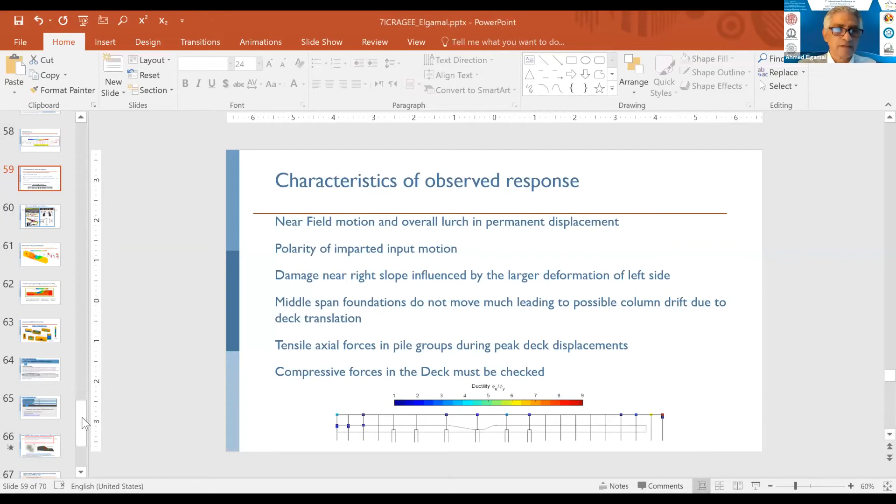It's a great honor to join you and have this opportunity to present my lecture. So let me please share my screen. Yes, sorry for interrupting, Dr. Ahmed. You have 40 minutes. Kindly let us see that you will complete your lecture, so that we'll have some time for interactions, please. Absolutely. Thank you. Thanks. Okay. Thank you, Laura. I think you can see my screen now. Yeah, it's good. Yes, very good. Yes. Thank you.

So I would like to focus today on computational simulation of nonlinear soil structure interaction with some applications, including applications for bridge systems and liquefaction. It's been a long journey trying to develop better tools for analysis of soil structure interaction, and it's still a continuing journey. Where I will leave off, others will continue. So some progress has been made, and I hope to share with you some insights and highlights of the work that has been done over the years.

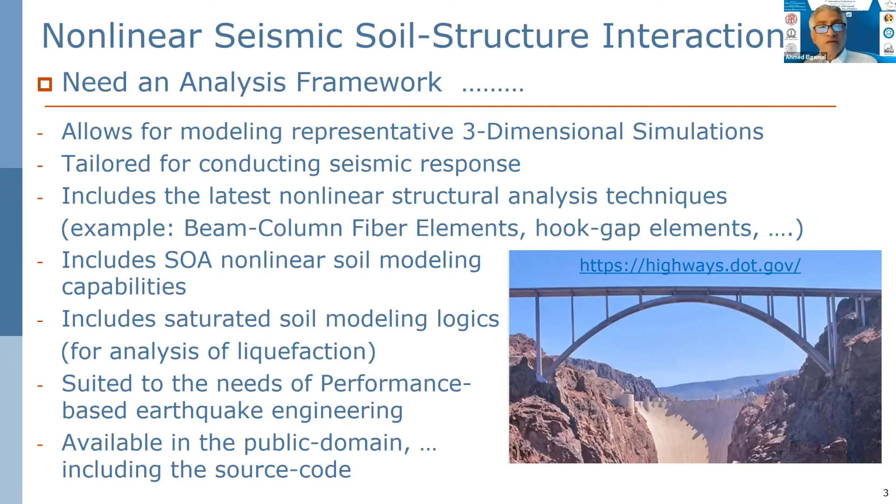Again, to get these tools to be more representative, much effort has always gone into calibration.

This is an illustration of our participation in Project LEAP for numerical simulation of centrifuge experiments conducted under this project under the leadership of Professors Kutter, Manzari, Zeghal, Ueda, and others.

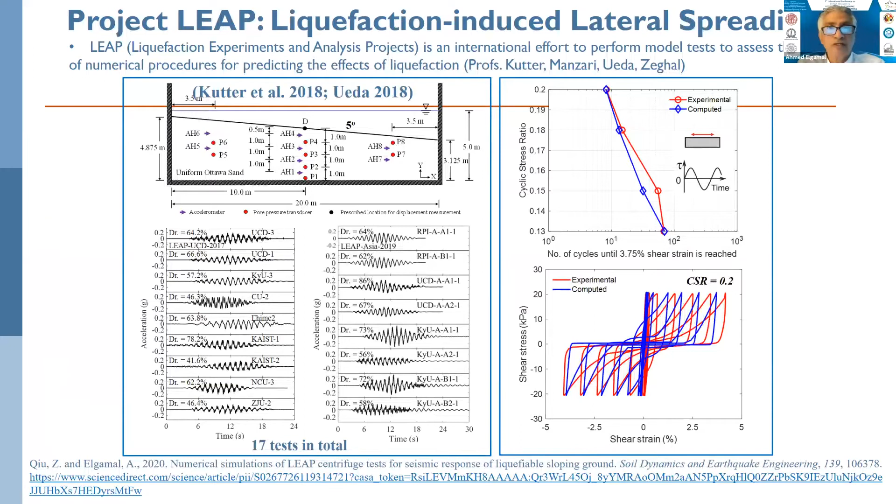Even with results available from centrifuge experiments and one-dimensional downhole array recorded motions from actual earthquakes, there is still room for more realistic outcomes from numerical tools when applied to three-dimensional simulation, particularly as it relates to soil structure interaction, which places additional demands on the level of strains near the structure as it pushes and pulls on the soil, as I'll try to show now.

I will present some of our work on three-dimensional soil structure interaction, looking first at situations where shear strains are relatively small, where equivalent linear analysis might yield reasonable outcomes. Then we'll look at large strains with elastoplastic analysis, and then scenarios with much larger strains, on the order of 10%, associated with liquefaction.

And then some strains, again as a consequence of liquefaction, in the vicinity of a foundation where the soil flows around it with strains much larger than 10%, trying to show this in the context of three-dimensional numerical simulations.

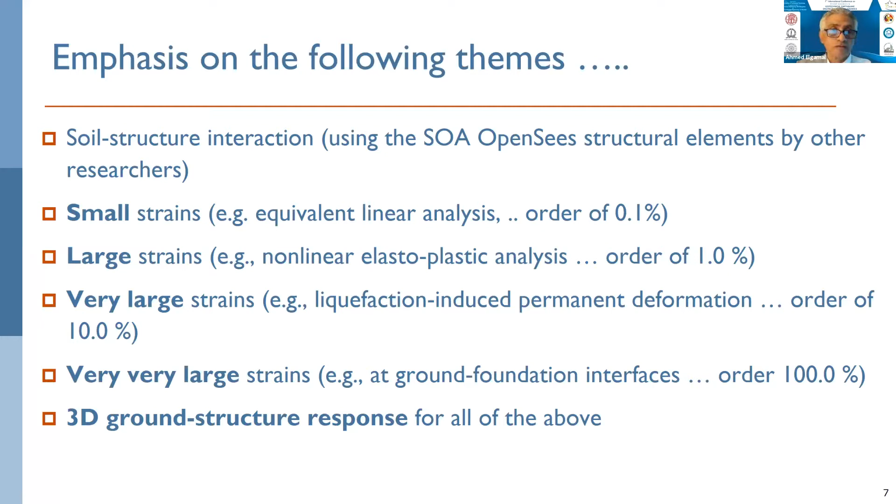We'll look at the response of an embedded structure and take the opportunity to look at site response away from the structure. Then we'll look at large pile groups, a wharf on piles, and three-dimensional bridge systems, including liquefaction.

Let's start with site response and embedded structures, as in situations such as nuclear power plant containment structures. In this study, the soil mesh is very large compared with the size of the structure, which is substantial in its own right.

Because of symmetry, it's a three-dimensional mesh, with shaking taking place in the lateral direction, shown here as a half mesh. With the input motion imparted at the base of the ground, we studied the outcomes when this motion is scaled by 1, doubled, tripled, and quadrupled in amplitude, comparing the response of fully nonlinear and equivalent linear analysis under these four levels of seismic excitation.

We also included a no-tension condition between the structure and the soil, a more realistic way to model the interaction, and had a transmitting boundary at the base. We used a pressure-dependent soil model for our nonlinear analysis.

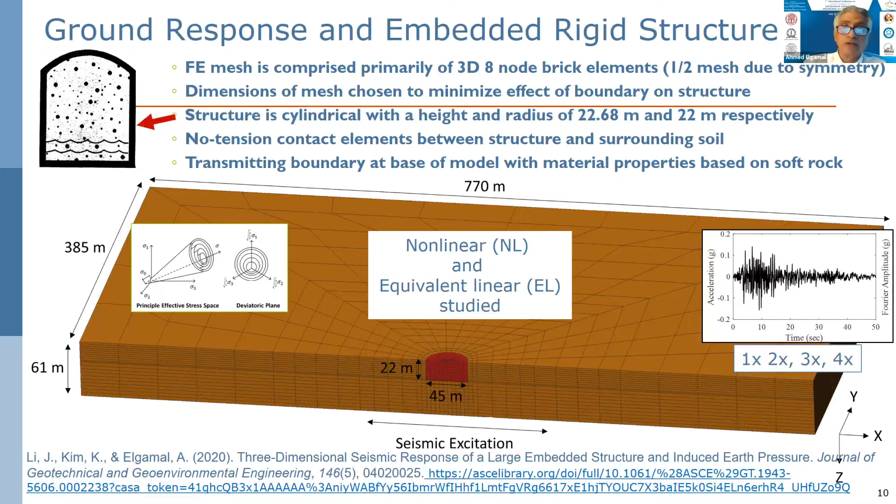As you know, in the equivalent linear analysis, the work is done by a secant modulus and equivalent damping at a particular shear strain level. And you see here that the reduction in modulus with strain amplitude is quite substantial. For example, here we go down approximately to 20% of initial shear modulus at a strain of 0.3%.

So if we look at the free field ground response in the beginning, we're showing here the shaking as it was, and then the shaking when it was scaled to 4 times its amplitude, so that's much higher shaking. We see at ground surface that at low levels of shaking, as you might expect, the nonlinear model and the equivalent linear yield very reasonable results and very close.

The response at ground surface is significantly larger than the response at the level of the base of the structure at 23 meters depth, if you compare this 6 and this 4.

And when you go to the 4 times the level of shaking, you see, of course, that because of nonlinear effects, this resonance peak is much muted and it is spread over the frequency range compared with the low level of shaking. And both the equivalent linear and nonlinear to some degree reproduce this.

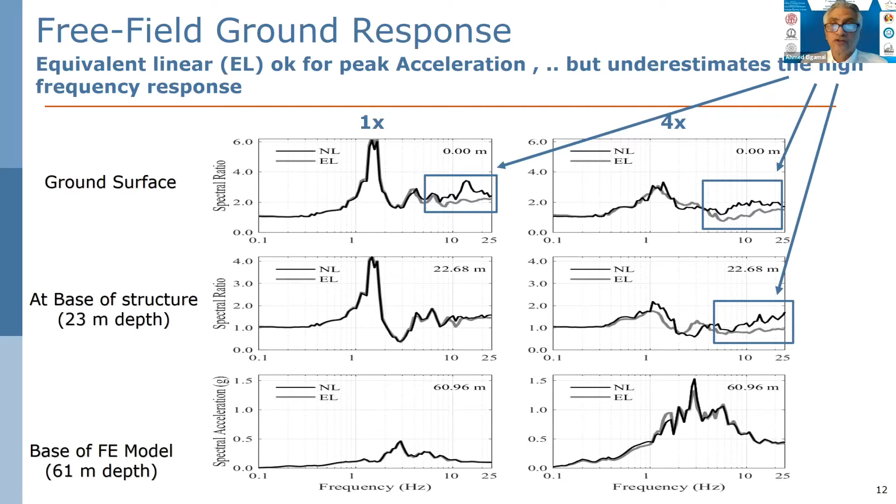Okay, so we go now to the response of the structure itself. Since the structure is at 23 meters below ground at its base, and the structure is fairly rigid, the first thing we see when we compare its response to the free field is that at the ground surface, the structural response is much less.

Also, the high frequency response, which is a consequence to some degree of site amplification in the upper several meters of the ground, is much reduced. And in general, the response of the structure is very similar to its response at its base at 23 meters depth, which is, of course, something that helps the structure a lot in having lower amplitudes of shaking and response.

So the deeper the embedment of the structure is, the less levels of shaking that will be observed compared to the nearby free field, which is good news.

Again, this is shown at 1 times the shaking and 4 times the shaking, the same thing where you see the free field is always much higher than the response of the structure, which is similar to its response at its embedded depth.

So when we found that the response of the structure is much less this way compared with ground surface response, and the high frequency response is much less as well,

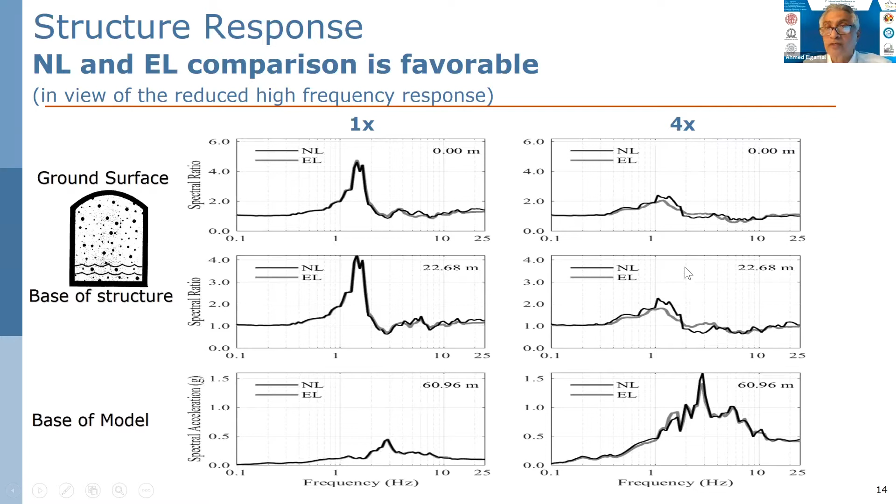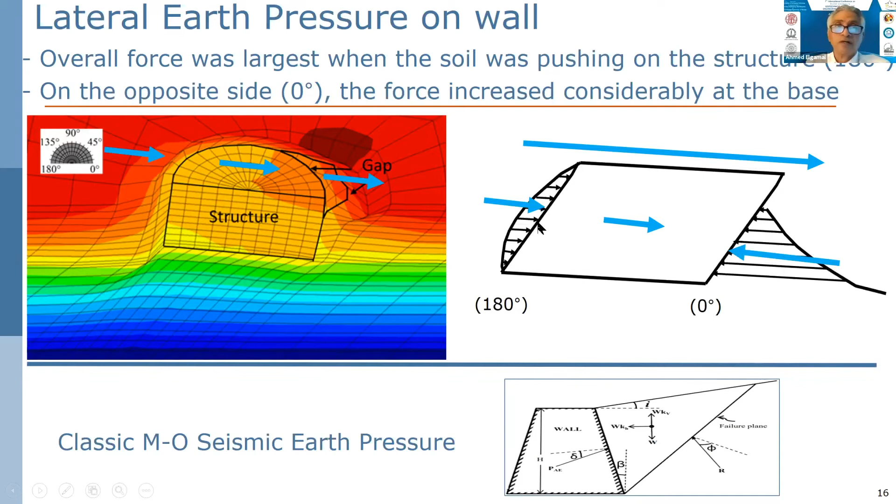So in summary, for the ground response, the site response at these relatively low levels of strain, equivalent linear analyses are reasonable, but underestimate high frequency response. For the structure itself, the high frequency response is much reduced. The acceleration at the top is very similar to the acceleration at the base, which is quite lower than the free field acceleration. The equivalent linear acceleration response compared well with the nonlinear counterpart all around, giving a reasonable result.

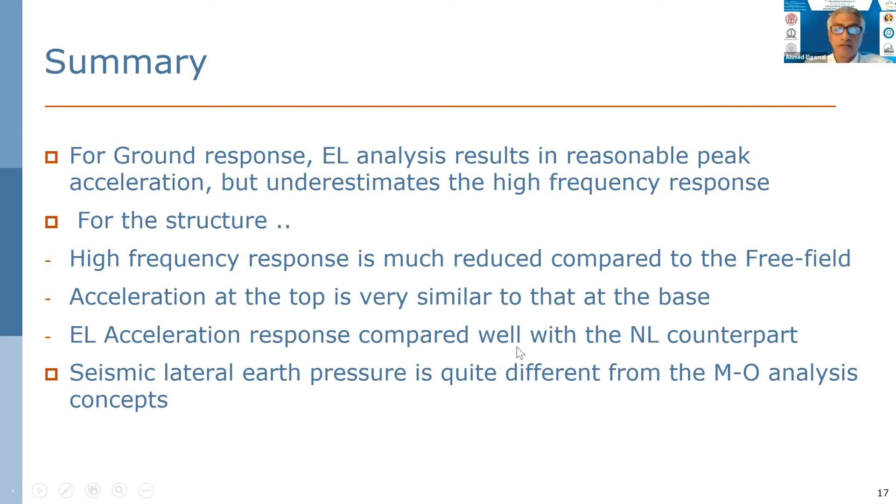And seismic lateral earth pressure is quite different from the Mononobe-Okabe analysis.

Now, moving on to large pile groups. There was an opportunity to look at the behavior of a pile group in a bridge where navigation is allowed in the center of the channel, for this Dumbarton Bridge scenario, for example. To allow for this navigation near the center of the channel, the bridge is very high.

As you see here, when we look at the bridge along its side view, in the center, these piers have a deck that is 27 meters above water level. Then there is the pile cap, and 14 meters into the water is where the mud line is. The piles are embedded 16 meters into the ground. So between the deck and the mud line, we have about 40 meters of elevation.

So when shaking comes laterally, in addition to the shear force experienced by the pile group, a huge moment will also be acting because of this very large moment arm, and the pile group will be subjected to a very large moment and at the same time a very large shear force. Whereas we tend to study pile groups under lateral load for seismic analysis, as I will try to show in this case, axial loads coming from that moment are much more important potentially, and might actually be the main cause for trouble compared with the shear force alone.

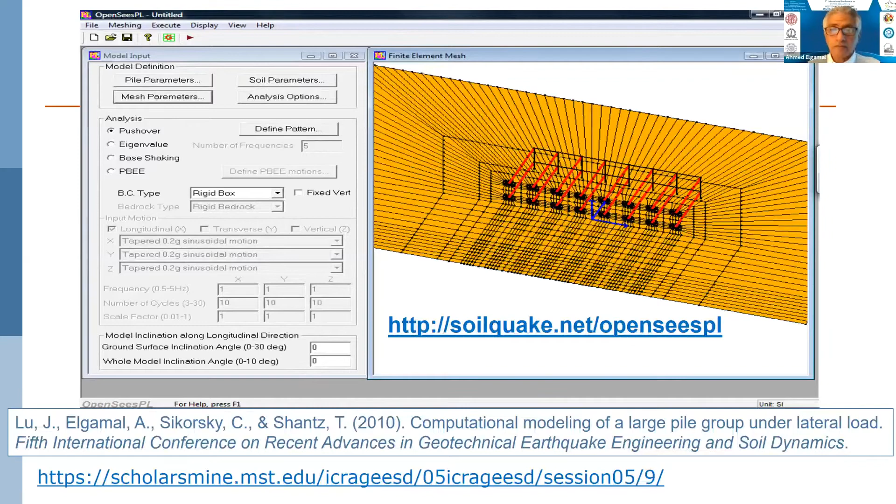So we use this platform, OpenSees PL, which is capable of producing finite element meshes in a user interface to look at pile groups that way. With a pressure independent soil, elastoplastic soil model, we looked at the bridge's own weight effects and the effects under lateral pushover analysis, equivalent to as high as the weight of the deck in the horizontal direction, as if there is a pulse of 1G applied to the bridge. You can see that the response of the pile group is highly nonlinear compared with its initial response because of the behavior of the piles, but also the nonlinear soil in this simulation.

Moments on the piles in this case were, of course, as you might know, corner piles ended up shouldering much more load than inner piles. This is again a half mesh, so these are the inner piles, these are the outer piles, and this is the corner pile. As the level of load increases, you see that the peak moment location is going downwards into the ground because of yield of the soil gradually from the high displacements of the pile from the mud line further down.

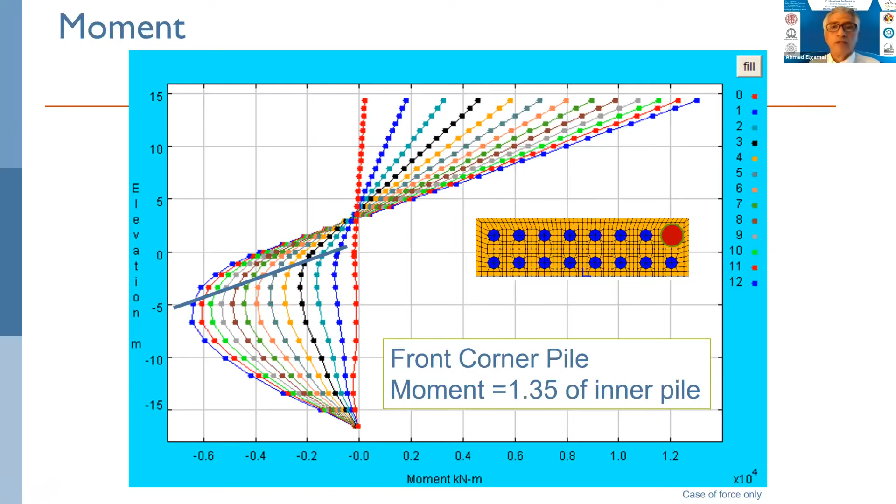Now looking at axial forces, just under the own weight, static own weight of the bridge, you see again that the corner piles carry much more of the axial load than the inner piles, and the edge piles also carry higher load than the inner piles. This is documented in the literature as an important mechanism, because of the availability of more outer soil here to resist load compared with the soil that is shared here by many piles and experiences load from many piles at the same time. Consequently these inner piles end up being in a flexible part of the soil and carry much less load compared with these outer piles and the corner pile in particular.

Now if we look at the situation where the pushover just included the horizontal force first, instead of the force and moment together, we see that the loads on the piles increase in the front here where there is compression, increase a lot more, and also turn from being compressive to tensile because of that very large moment, being 3.4 times, for example, the axial load under static load, as a normalizing quantity for a single pile scenario. So 3 times the load in tension as compared with 1 time the load in compression under just the own weight of the bridge.

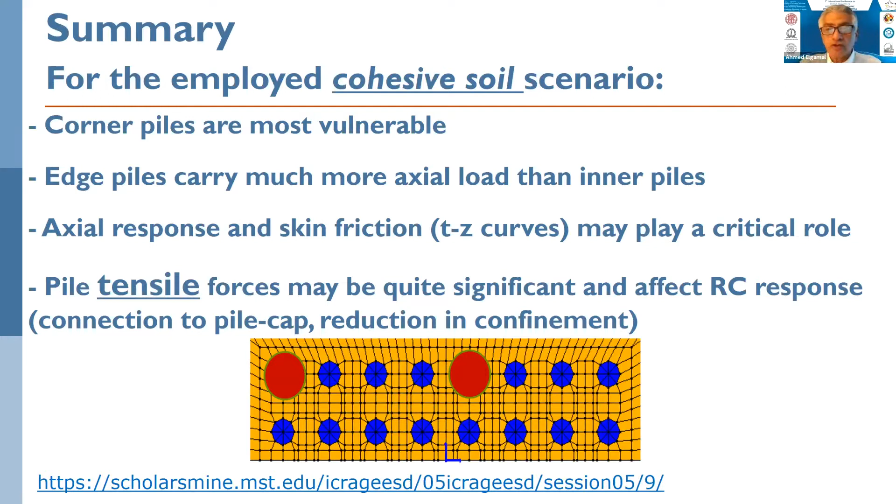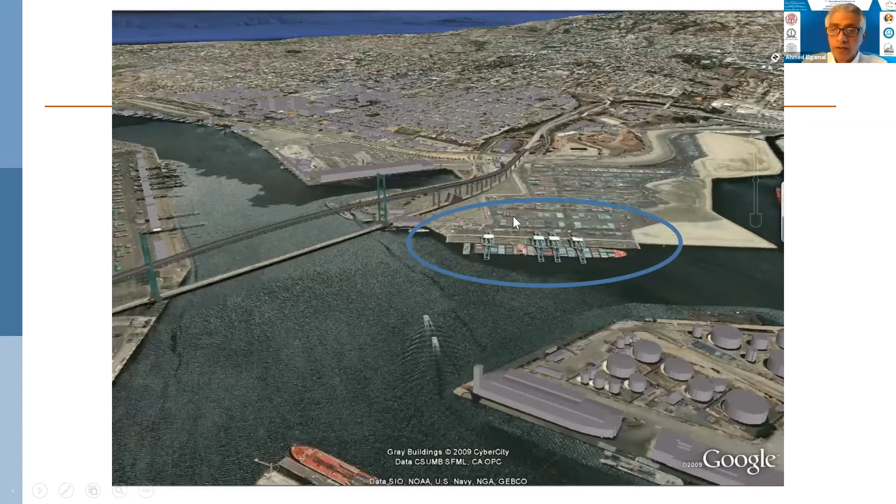Okay, if we look at a scenario of wharfs on piles - these types of structures are the prevalent type of wharf foundation in the United States. This is a picture from the Port of Los Angeles. The ship is here, the container ship is here, and the wharf is here. This is a close-up of the wharf, and here is the container ship. This wharf is supported on many, many piles, as you see here.

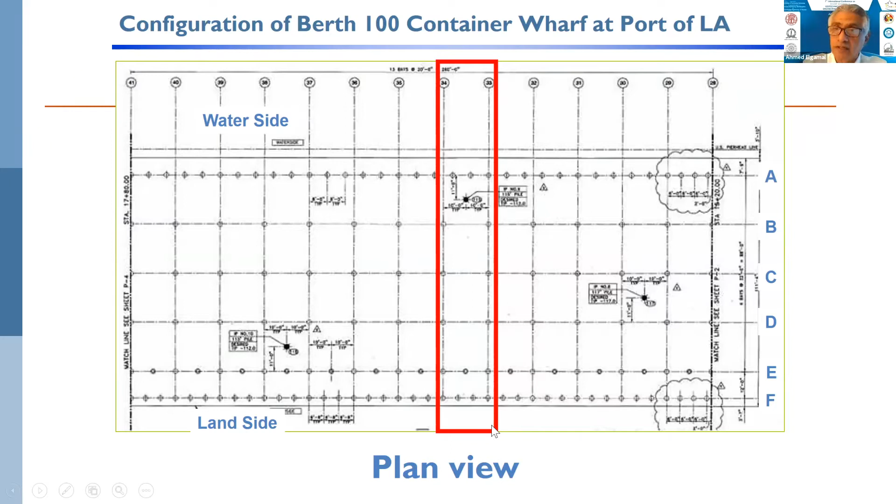So when we looked at the plan view of this wharf, we saw that the pattern of the piles keeps on repeating itself from one end of the wharf to the other. And so that allows us to take a three-dimensional slice and study it as a representative of the response of the entire wharf from beginning to end, a symmetry slice if you will, but it's a three-dimensional slice. So this is here the three-dimensional slice.

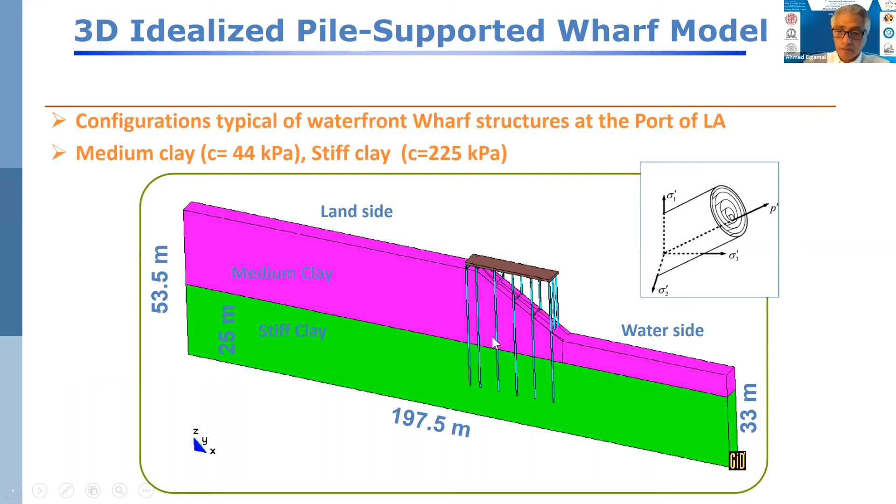Again, doing seismic excitation by shaking at the base, by including one-dimensional shear beam columns that capture boundary conditions on the right and on the left, which is essentially free field response on the land side, free field response on the water side.

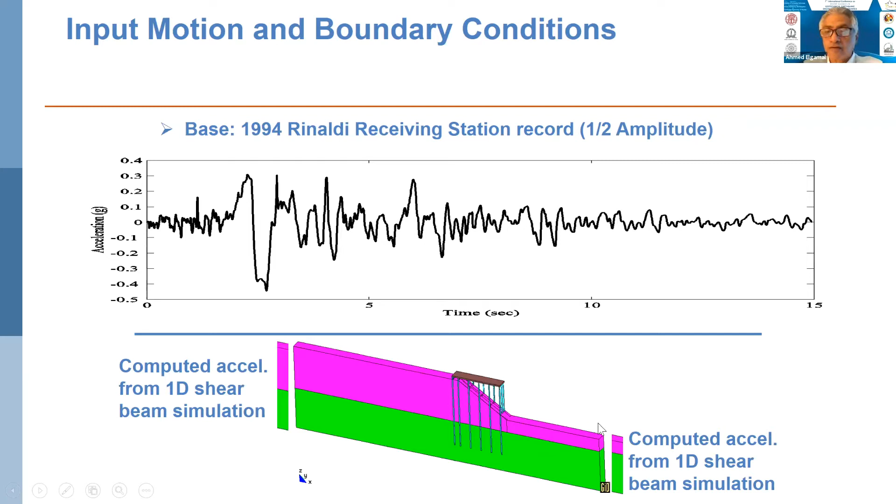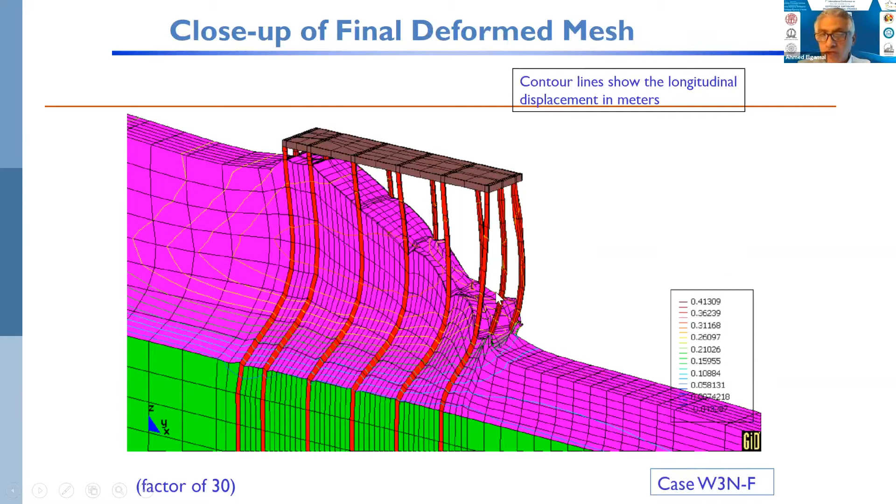The piles change the configuration of the deformation of the slope, and this displacement pattern is very different from the pattern if the piles were not present. So here is the deformed configuration after shaking. And it's obvious that all piles, actually, the piles that have a very large free length, and the ones that have a very small free length, all deform in a similar way because they're all deforming according to the deformation of the slope. And in a sense, it's all an integrated deformation. There is no additional deformation in the front, for example, compared to the back.

So in general, to a great extent, the front piles and the back piles undergo very similar displacements and relatively similar moments, which was something some people disputed, proposing that the front piles, because of their free length, are more flexible and suffer less than the back pile that doesn't have as much free length.

As importantly, since all these piles are connected to a very rigid deck at the top, because of the deformation of the slope downwards on the land side and upwards on the water side, all kinds of tensile forces evolve in the piles since they're all connected at the top. So you get compression, you get additional tension, and depending on the part of the pile in the softer soil versus the stiffer soil, you get all these kinds of changes.

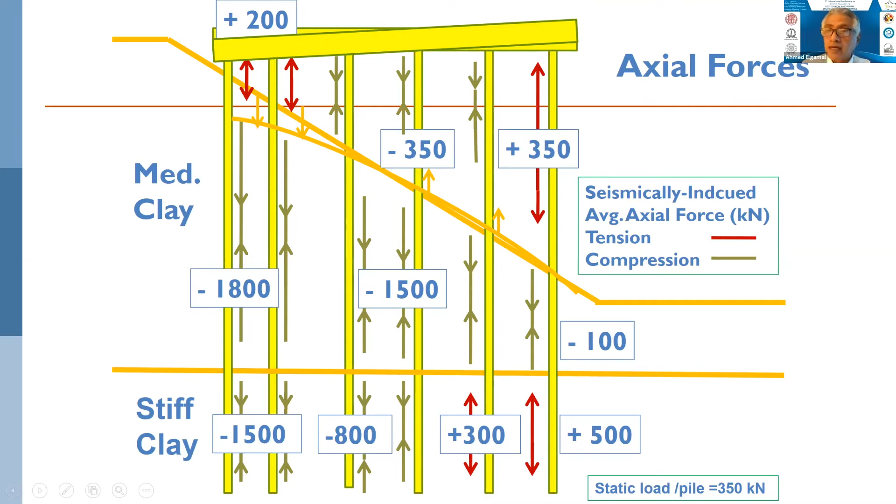It's likely that tensile forces might play a very significant role in the integrity of the wharf-on-pile scenario, compared with just the attention everyone pays to lateral deformation and the additional moments imposed on the pile. So what this slide is attempting to say is that in addition to bending, axial loads are quite important and require further attention.

Okay, so going quickly to bridge ground systems.

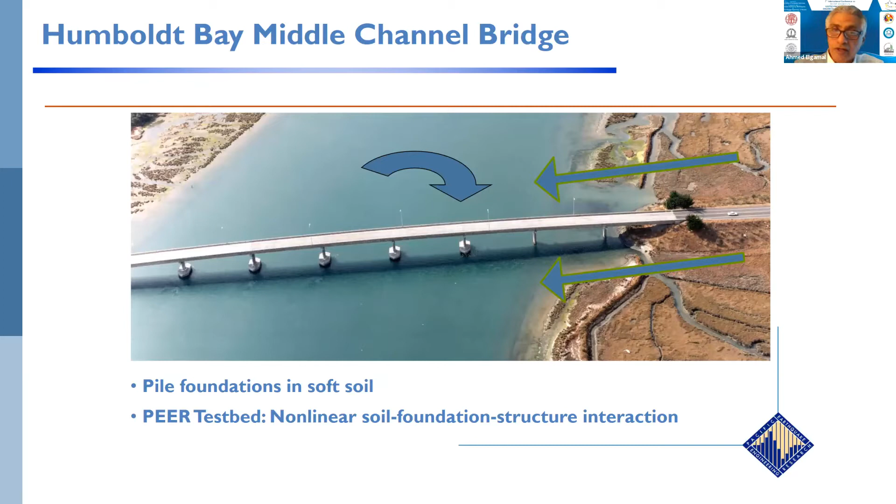Three-dimensional simulation for bridges is actually something that leads to much more realistic outcomes. This was an effort done early on, several years ago, and the idea was to try to capture some of the things that idealizations in 2D are not able to capture. For example, the 3D pile foundation configuration, the 3D ground response, and the 3D characteristics of the response of the deck and abutments can only be captured if the simulation is done in three dimensions.

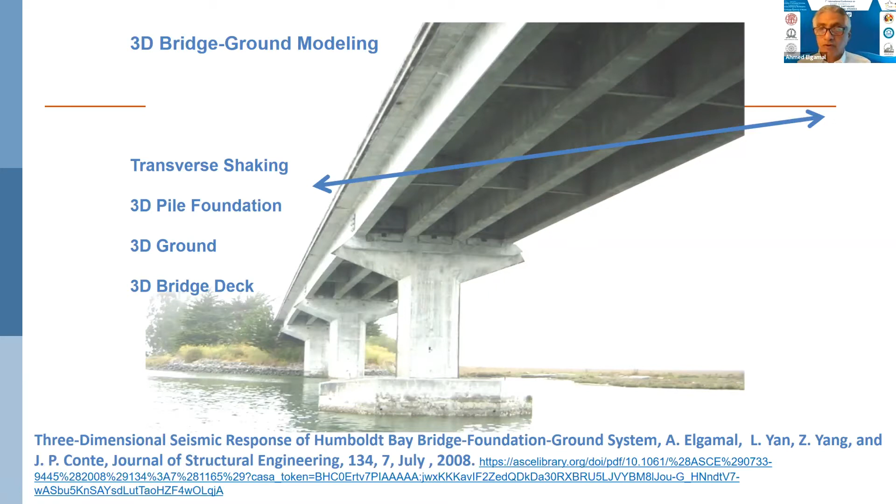OpenSees allows for, as I mentioned earlier, integration of state-of-the-art fiber element beam column elements to represent the nonlinear response of the bridge structural elements. So along with the nonlinear soil response, the bridge is also modeled using the latest tools available for nonlinear response of reinforced concrete, tools that are still available in OpenSees by Professor Fillippou of UC Berkeley.

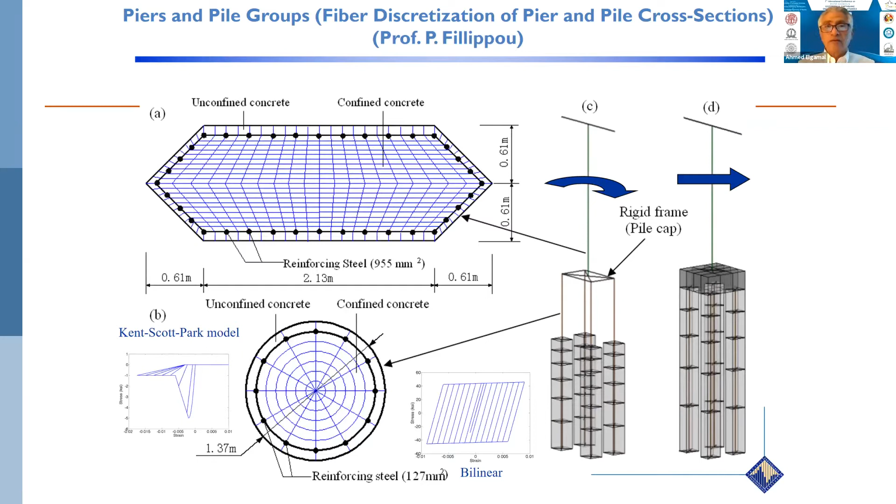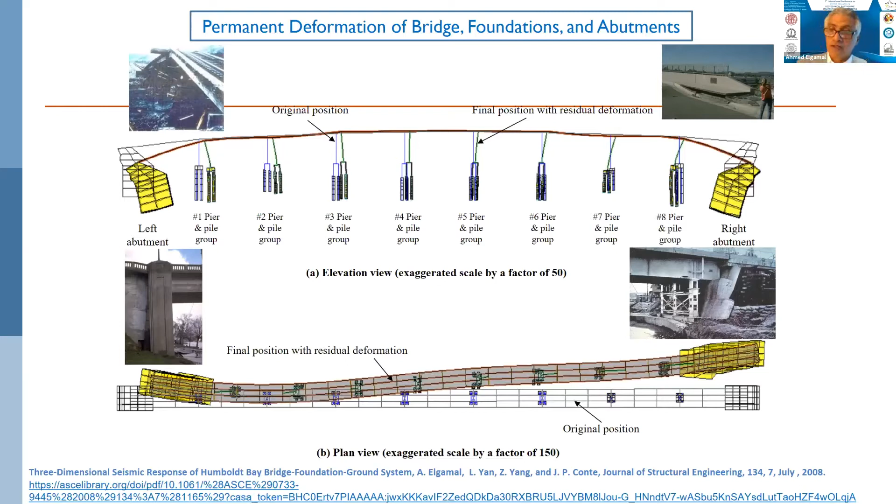Okay, moving on to looking at bridges under liquefaction. We have been looking at a few actual bridge scenarios from California, where the bridge has different structural configurations at different sections of it, and different cross sections of the support, such as the shear wall, the columns, or the piles.

The soil is also not uniform along the longitudinal direction of the bridge. Different soils, according to the borings, are idealized here in terms of 3 different configurations: on the left, in the center, and on the right of the bridge.

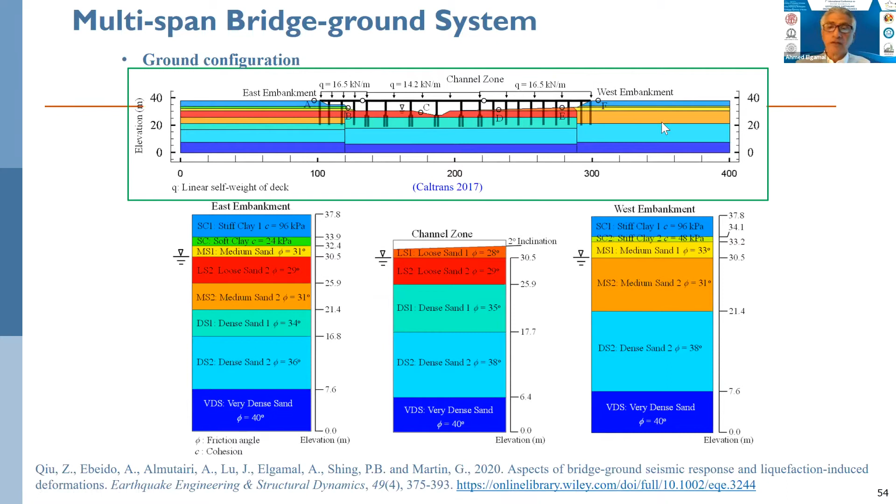Everything for the bridge is modeled with fiber elements. Similar to what we did for the wharf, we attempted to take a slice in the bridge in its longitudinal direction. This slice is not as representative because the bridge is not as wide in the transverse direction as the wharf, but it still allowed us to observe some mechanisms of the response that are quite significant.

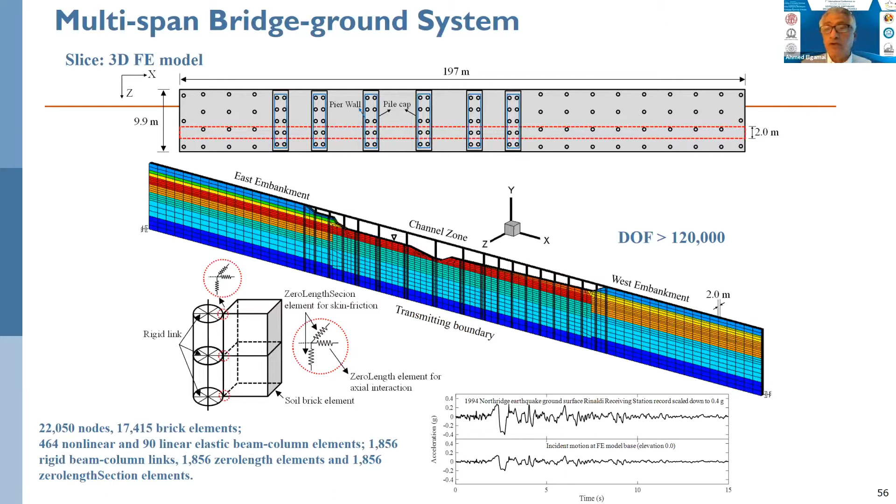In this case, we did shaking using Rinaldi motions from the Northridge earthquake. The important thing about it is that it's a near field motion with a preferred pulse in one direction. This has a consequence on the response of the bridge, in that in addition to the ground deformation near the slopes and abutments, with soil flowing toward the center of the channel on both sides, the entire ground ends up with a permanent deformation in a preferred direction because of this near field pulse.

If you reverse the input direction of the motion, what is positive in acceleration becomes negative, and what is negative becomes positive, and this permanent deformation will revert to the other direction. So what is really happening here is a consequence of this overall lurch because of the near field pulse, plus the slope deformations on both sides, added together to produce the outcome.

Because of this permanent lurch, the deck moves forward permanently on both sides, and along with this forward motion, the slope is also pushing on the deck this way. So we end up with the soil on the right side pushing to the left.

Because of the forces coming from the deformation on the left side and the lurch, the deck moves to the right. So we end up with trouble here, not only coming from the slope deformation, but also from the deck moving in the opposite direction, causing forward motion at the top, backward motion below, and additional trouble to the piles. These piles are affected by what is happening on the other side, not only by the local slope, which emphasizes the need to look at response in three dimensions.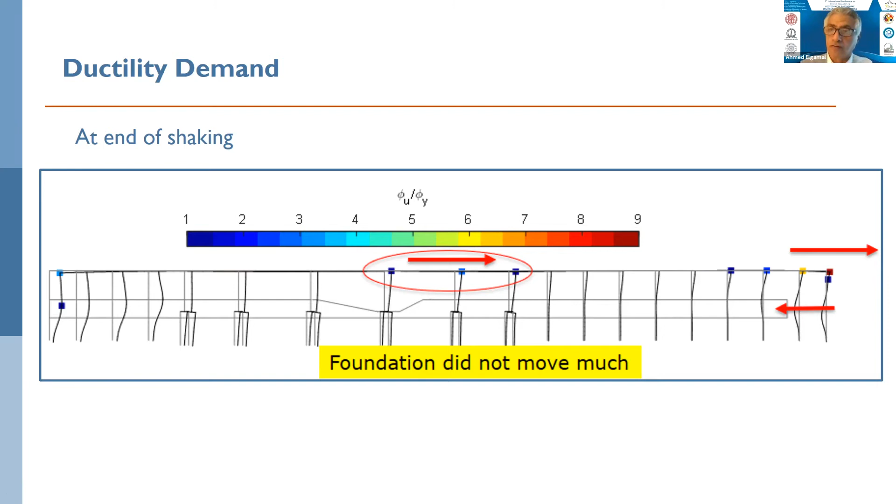In the center of the channel, the foundation doesn't move much, but the deck moves permanently, which can result in unseating and large moments on the middle section piles. This is something not captured at all when people study the left side on its own, or the right side on its own, under lateral spreading due to local deformation at the abutments.

So this is what this slide is trying to summarize. In the end, the most important thing is looking at the bridge and the ground as a system, not looking at one side at a time.

As you see from this study, there is trouble on the left and trouble on the right. Some of the trouble on the right comes from the motion of the bridge to the right, affecting what happens there. Also, in the center of the bridge, the trouble is not coming from deformation of the foundations, but from the permanent deformation of the deck to the right, where the foundations don't move much.

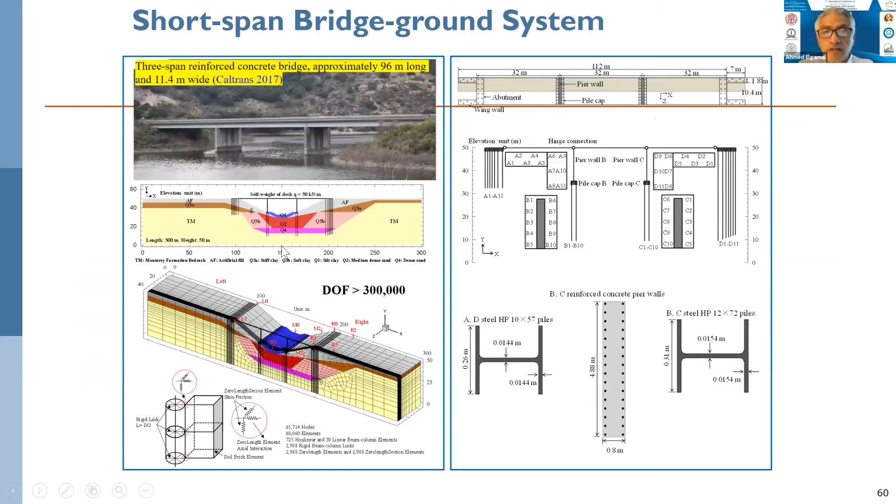When we looked at what we call a short span bridge, where the two slopes are in a narrow canyon close to each other, we saw significant interaction between the deformation of the slopes. Displacement of the left slope interferes with displacement of the right slope, leading to much less lateral deformation compared with studying, for example, the right slope alone, which was the more vulnerable slope on its own.

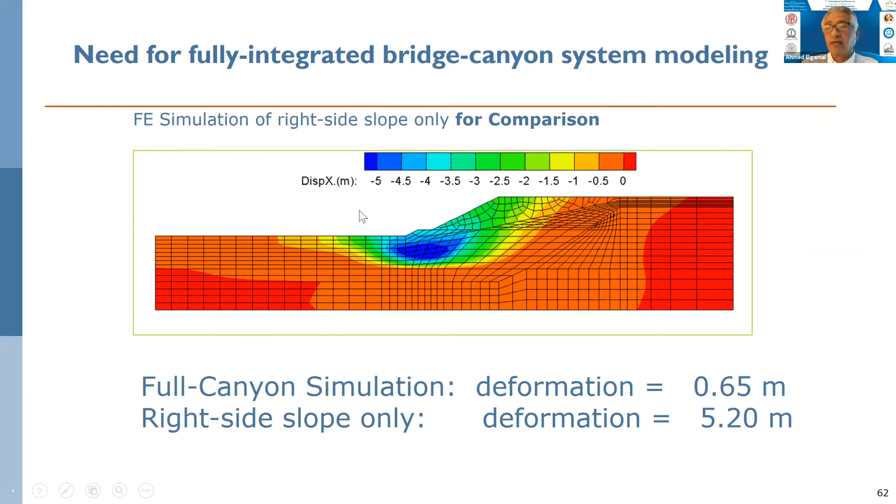If you just looked at the scenario of the left slope on its own, or the right slope on its own, the deformation under the same shaking was 5 meters, which became only two-thirds of a meter because of the interaction when the full canyon was involved with a slope on that side. This leads us to think of the importance and significance of doing a system response and a three-dimensional analysis to capture the more realistic picture, as opposed to looking at one section at a time.

Some of these tools are available at this website, soilquake.net. As I mentioned earlier, these tools were developed for OpenSees. More recently, we tried to make some of these tools also available for use in other codes like FLAC, LS-DYNA, Diana, and Abaqus. You will find some information about this at the SoilQuake link.

Also, if you're interested in calibration using actual data from recorded earthquakes from downhole arrays, we have this data uploaded for two locations, and it's available to download at the site as well, for your own use.

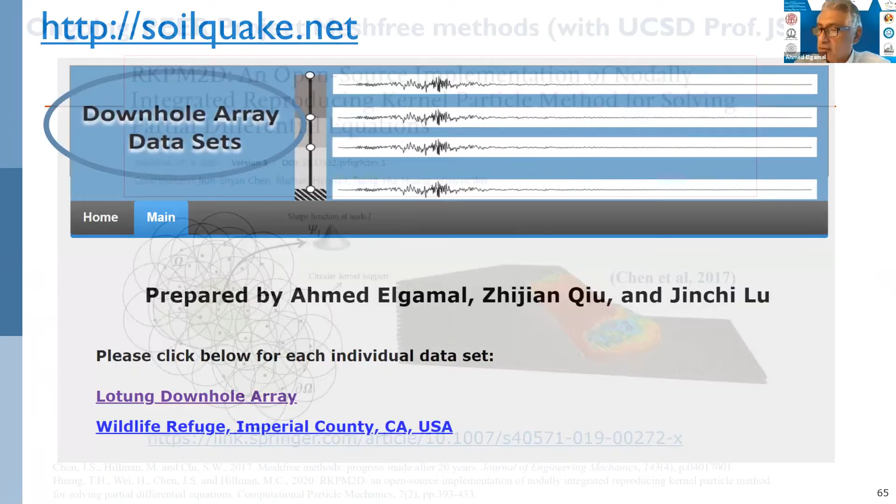I think my time is up. I need to turn this off. Yes, please, maybe you can. I request you to slowly wind up. Yeah, no problem, yes I am.

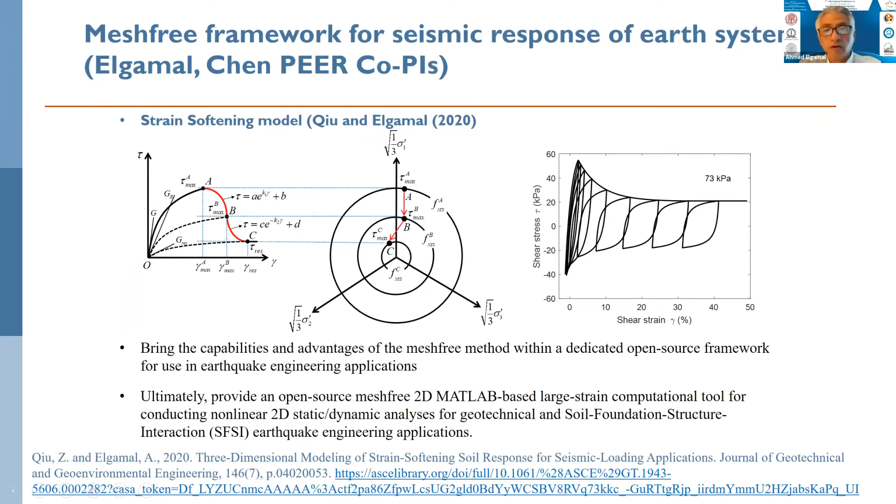Finally, some recent work looking at geometric nonlinearity is being directed towards a technique shown here. This is a meshless representation, as opposed to finite elements, which lends itself more to looking at very large deformations with strain softening soil models that have been recently developed. This work is ongoing; we're trying to capture aspects of geometric deformation in addition to material nonlinear deformations, so we would also bring into the picture geometric nonlinearities.

Okay, I think that concludes my presentation.

Thank you very much. Thank you so much, Professor Ahmed, for giving a very informative lecture. I request the co-chair to please get ready for the question and answer session.

Meanwhile, I'll just summarize what I could understand from the lecture of Dr. Ahmed. Co-chair, please get ready for the question and answer session. Maybe you can go through the box where a lot of questions may be there. We can kindly get prepared. Just one minute, I'll try to summarize and maybe initiate one question.

It was a wonderful lecture. The Professor introduced the subject with containment structures, the effect of equivalent nonlinear analysis versus detailed nonlinear analysis, and how the response of the containment including the soil differs, with variation of frequencies and amplitudes when you take soil structure interaction and nonlinear effects of the soil into account. He explained this very nicely, giving a lot of insight into the subject. Then he explained the pushover analysis of bridges, which is very important because everybody is now going for performance-based design of structures, and soil definitely cannot be ignored, so you have to consider that.

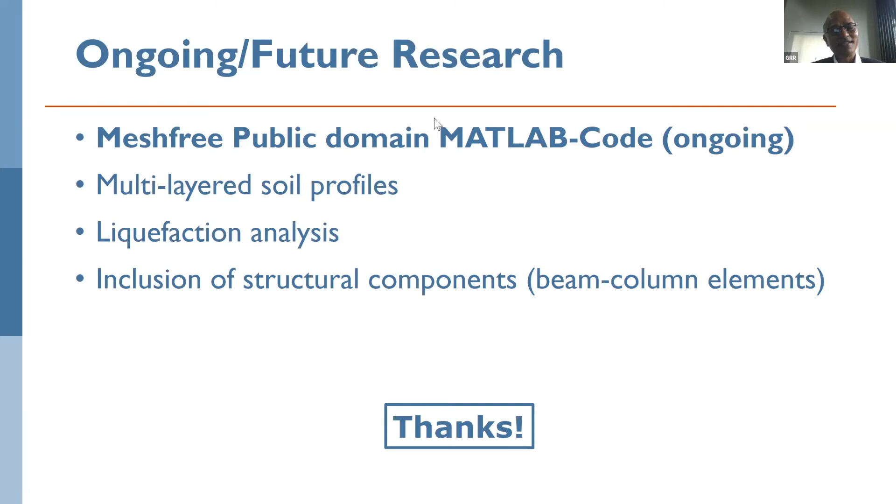He explained very nicely a procedure for doing the pushover analysis and seeing the various levels of performance under earthquake loads considering the bridge. He also explained a lot of cases with respect to bridges and port structures very clearly, and it's very interesting that his lecture says designers have to take nonlinear effects into account when they want to say that bridge structures are safe for earthquake loading.

So just to trigger the question and answer session: can you please elaborate on the slicing on the bridge when you are taking the modeling and making the model and analysis? This is a request from my side to trigger the question and answer session so our co-chair will be ready for the questions, please.

Yes, please, session, Dr. Ahmed please. Thanks very much for the wonderful lecture. I learned a lot of things from your lecture, and it also generated a lot of thinking about how to go about future research. Thank you very much. Yes please, Dr. Ahmed.

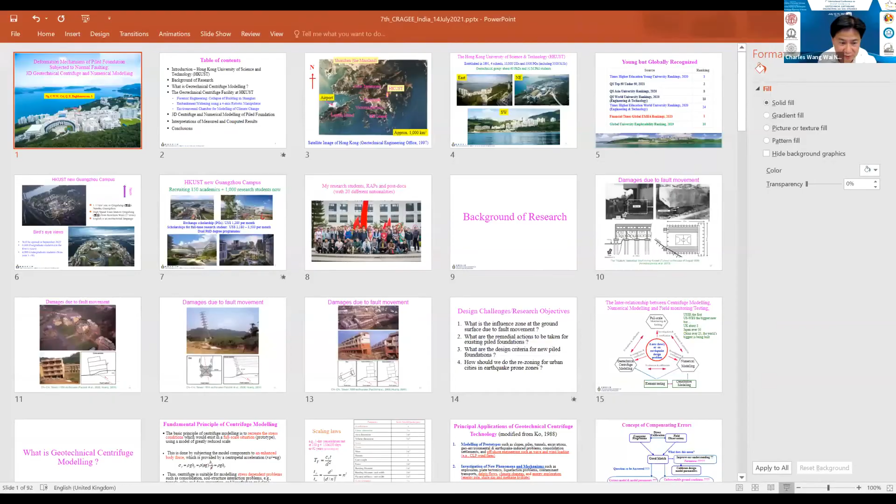Thank you. Before I start, I would like to thank the organizing committee for inviting me to make this presentation, and also thank my co-authors, Dr. Tai and Dr. Wang Sheng, for their contribution to the work I'm going to present. Due to the time constraint, as the chairman said, I decided to move out anything to do with tunneling in my presentation. But in the written submission, and in our paper, we cover both pile foundation and tunneling subject to normal faulting.

So here is the content of my presentation. First of all, I would like to briefly introduce my university, because as we all know, the objective of a conference is to exchange technical information but also to encourage collaboration among universities, researchers, and engineers. So I decided to give a little background introduction to my university so that, if you're interested, perhaps we can establish different forms of collaboration.

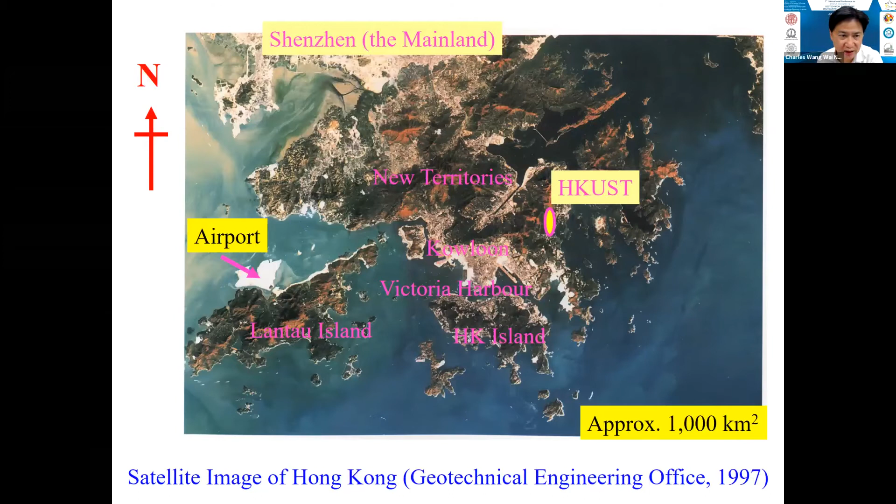Here's an aerial photograph showing Hong Kong. Hong Kong is very small. If you land at this airport on the left-hand side, then travel east about 40 minutes, we reach our campus on the east coast. Here are a couple of photographs showing our campus from different views. I hope you agree with me.

Our campus indeed looks very beautiful. Our university was established about 30 years ago, in 1991, and we have 4 major schools. Our university is small, by the way. We only have 4 schools, about 10,000 undergraduate students and 5,000 postgraduate students, including 3,500 master students, MSc students.

But in the geotechnical group, we are sort of pretty large. We have about 60 PhD students and 30 MPhil students. Although we are young, we are globally recognized by Times Higher Education as a young university, which means the university has to be below the age of 50. In 2020, we ranked #1, and in the QS ranking, we ranked #2 in 2021.

Good news perhaps to share with you is we are building a new campus in Guangzhou, which is twice the size of the one we have in Hong Kong. The Guangzhou campus is located only 27 minutes by high-speed rail from Kowloon to Qingsheng Station, very close by fast-speed train. English will be the main instructional language used on campus, and the new campus will open next year, September 2022.

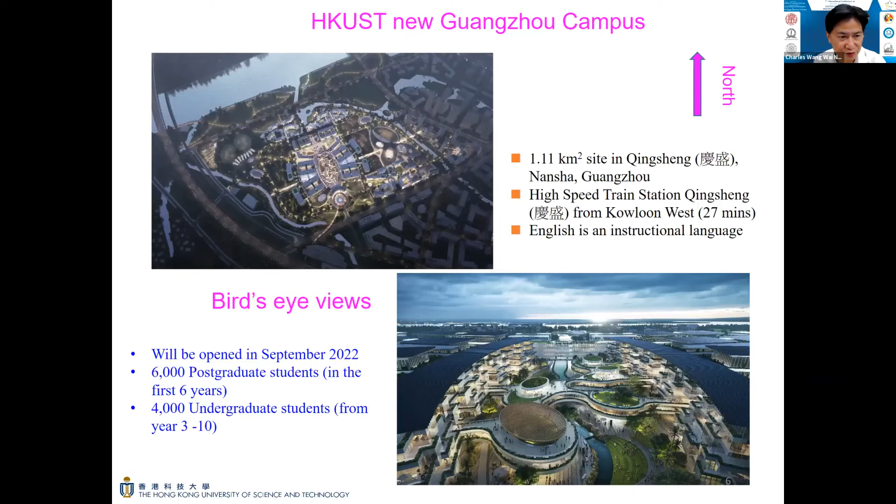There are a couple of pictures showing the new campus from the architectural drawing, and that's how it should look like.

At the moment, we are recruiting 150 academics, meaning professors from assistant professor up to full professor. We are also recruiting about 1,000 research students now, so if anyone in the audience is interested, please go to our website.

Talking about collaboration, whether it's the Hong Kong campus or Guangzhou campus, we do encourage exchange programs, meaning students from India can come to Hong Kong for 6 months, and our students can go to India for 6 months. This is fully funded by our exchange scholarship, which is currently about $1,200 per month, enough for a single research student. We also have full scholarships for full-time students, depending on the type, ranging from $2,000 to $3,500 per month.

We also have a dual degree opportunity, meaning institutions like IIT, if interested, can sign an agreement with our university. We have a dual degree program where students can spend 2 years on each campus and get a dual degree.

Here is my research group. You can see my group is very international. I have students from South Africa, United Kingdom, Bangladesh, Thailand, and India. This one graduated a year ago, and also Iran for instance. I also have students from Pakistan and from a couple of African countries.

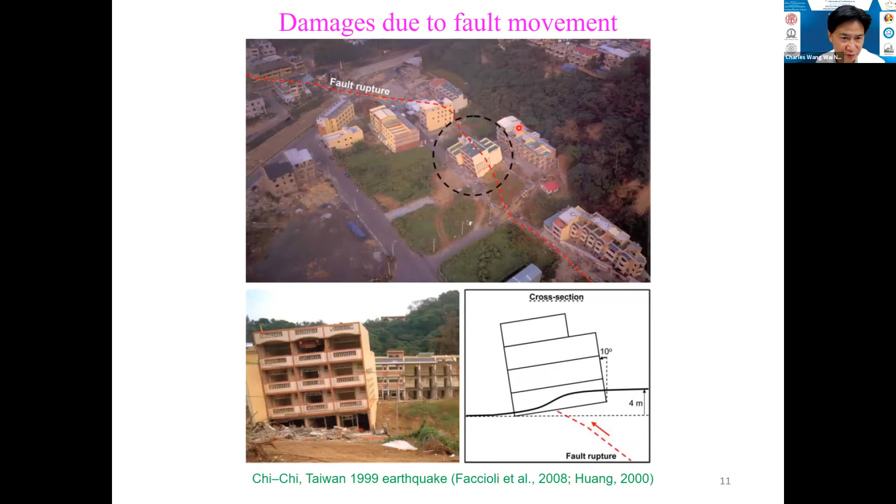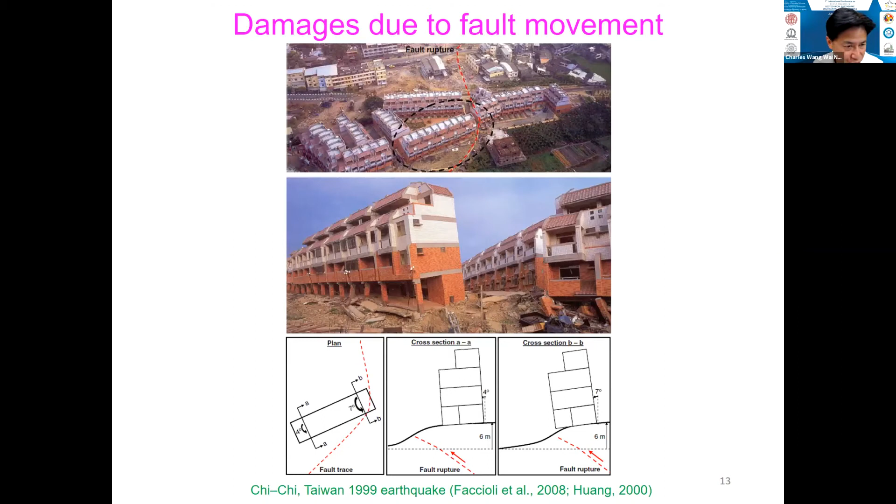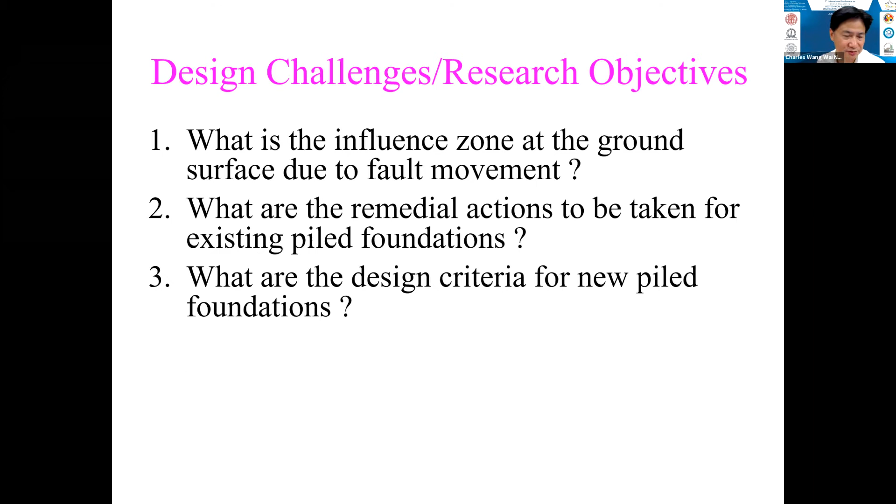So our design challenges and research objectives - the results I'm going to present actually originated about 10 years ago, initiated by Beijing's city government. They really wanted to know, for example, what is the influence zone at the ground surface due to fault movement? Second, what remedial actions can be taken for existing pile foundations? What are the design criteria for new pile foundations? And what should we do for rezoning urban cities in earthquake-prone regions or zones?

Those are the design challenges imposed by the Beijing city government, which became our research objectives. We were commissioned to carry out over 30 geotechnical centrifuge tests. This picture shows the interrelationship between centrifuge modeling, numerical modeling, and field monitoring. Geotechnical centrifuge is just one of the 3 tools we use to tackle earthquake design problems or to verify new theory. Today I'll only focus on geotechnical centrifuge and numerical modeling.

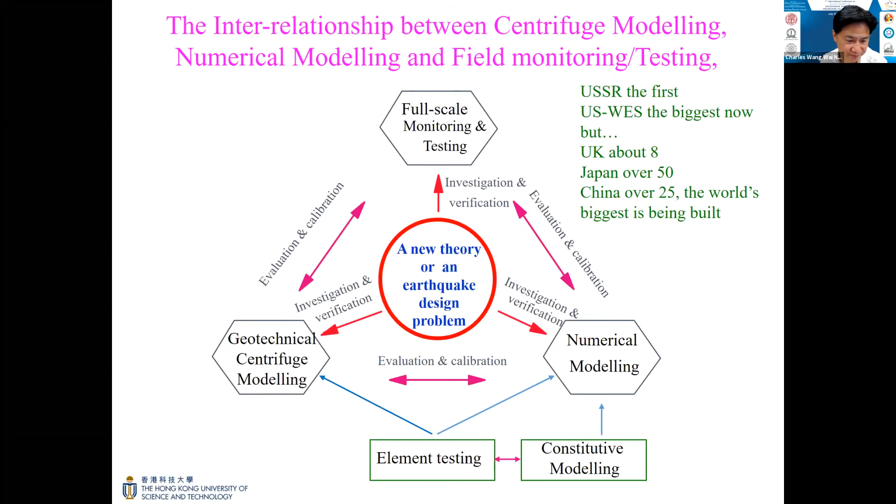So what is geotechnical centrifuge modeling? Just in case you are not familiar with it, I will briefly introduce it to you. The basic principle of geotechnical centrifuge modeling is to recreate the stress conditions that exist in a full scale, what we call a prototype, using a model of greatly reduced scale.

How can it be done? This is done by subjecting model components to enhanced body force, provided by centripetal acceleration, R omega squared, conventionally equated to a number of times Earth's gravity, so NG. NG is also my surname, so now you understand why I do centrifuge work, because my surname is NG.

Mathematically we can easily show that P, the prototype stress or initial stress sigma in the field, is rho g HP. In a centrifuge, we can reduce the dimension, say height, by n times. Then what you need to do is just increase the G level by n times, so you get back rho g HP. So the principle, as I say, is extremely simple.

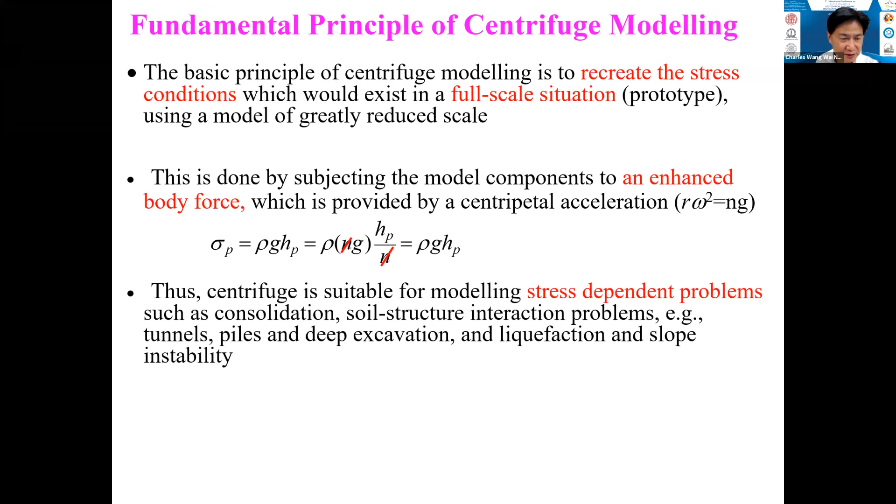The centrifuge is suitable for stress-dependent problems, such as consolidation, soil structure interaction problems, like the presentation given by Professor Elgamal on soil structure interaction subject to earthquake, and also liquefaction and slope instability, etc.

That's why we must get the stress right before doing the experiment, by increasing the stress state from 1G to high G, so that the stress state at B is almost identical to the field.

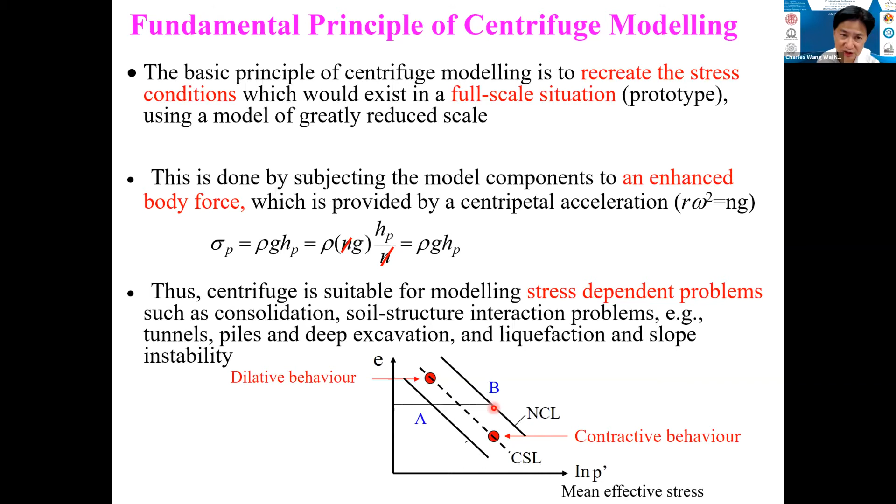Of course, any physical model test is subject to a number of scaling laws, if not all. One of the most useful is consolidation, for example, where the time factor, prototype divided by model, is n squared. So if we carry out one-day consolidation at 150 G, which is the optimal capacity of our centrifuge, it will be equivalent to about 62 years of consolidation time.

In the interest of time, I will not go into detail about all this. So just quickly, four major principal applications: one, modeling of prototypes such as slopes, tunnels, liquefaction, earthquake-induced problems, consolidation, etc.

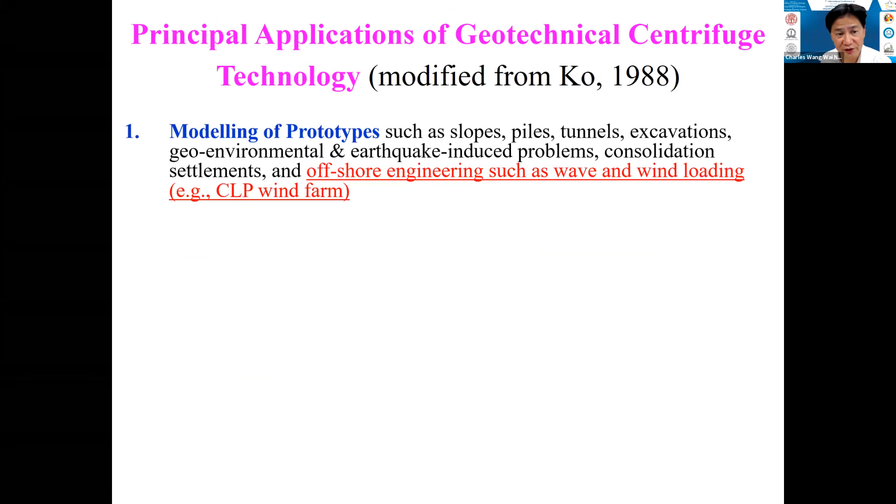Recently there's also increasing use in offshore engineering, such as wave and wind loading on wind farms, and investigation of new phenomena and mechanisms, such as explosions, plate tectonics, and recently debris flows, climate change events, and energy exploration, such as shale gas and methane gas, methane hydrate, for instance.

We can also use it as a tool, similar to a numerical tool, to carry out parameter studies in the centrifuge. But I think the most important use of the centrifuge, to me, is to calibrate numerical models and methods.

Especially now that computers are so powerful, how do we know our calculated results are correct? Very often I hear people say, okay, we calibrate against case history. But I do have a word of warning about that.

Here we have field observation and we have the computer program. When we get a good match, if we ask ourselves carefully, what does that mean? We have to be very careful to think about it, because in the field we have a lot of uncertainties. That's why the contractor and client use the term 'unforeseeable ground conditions.' Whereas in our numerical analysis, we assume K0, we assume the water table wherever it is, boundary conditions - and usually, actually, we don't know.

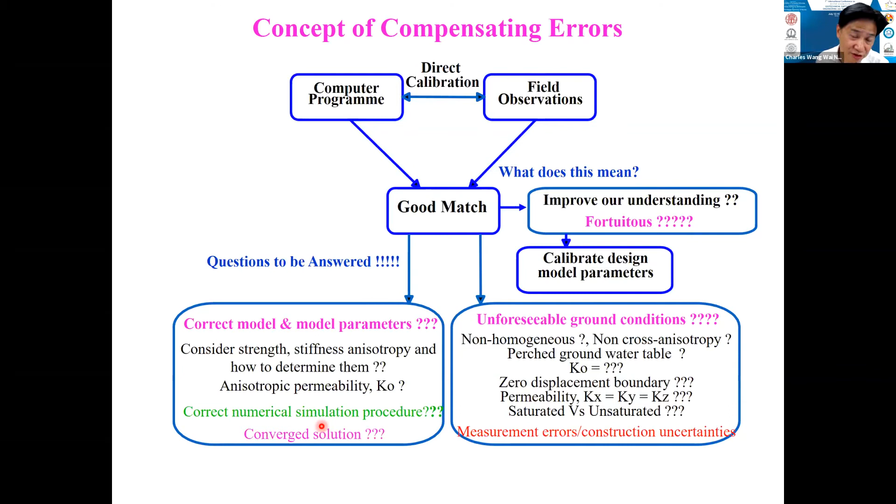So a good match is in some way quite fortuitous, lucky in some ways. Now I'm not saying numerical modeling is not good, I'm just saying we must be very careful. Then how can we do better?

My suggestion is we must calibrate - before calibrating with case history, we calibrate with physical model tests. Although 1G model tests cannot represent full scale stress, 1G tests are still useful because, for example, under low stress, dilation occurs. So if your model, model procedure, or model parameters are any good, you should be able to capture the dilatancy of the event. My suggestion is we go for calibration of physical model tests first before calibrating with a case history.

Model tests are good in the sense - although again model tests cannot truly represent what happened in the field - we almost know everything we put into our physical model. So there's not much uncertainty in our model tests, unless your student deliberately wants to fool you and puts a stone or rock into your soil model, which is a different matter of course. In theory we're supposed to know everything in our model tests, so that gives a lot of confidence, provided your test is conducted properly. So this is my suggestion.

This is our centrifuge in Hong Kong, since 2001, a beam centrifuge. When you spin it up, it's 8.4 meters in diameter and can run to 150 G. For earthquake problems, in 2001 we had the first shaking table mounted on a centrifuge, and we successfully ran tests published in different journals.

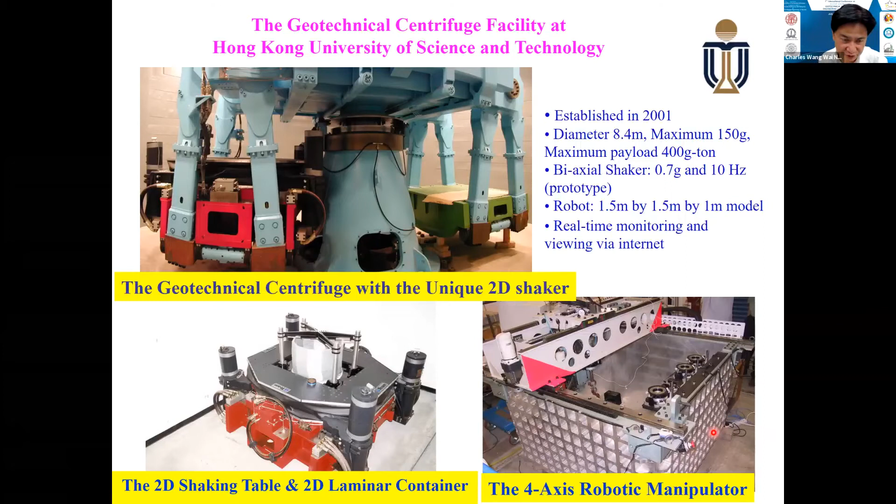We also have a 4-axis robotic manipulator. Later on you will see this baby in operation, in one of the examples I'm going to give you.

If I may show you a first example, a forensic engineering investigation - we were commissioned by a client in Shanghai to investigate a building collapse. You can see the collapsed building here, a closer view of it, and a picture taken during the collapse, showing what happened just immediately before.

There was bad filling on the right hand side and excavation on the left hand side. This is a schematic diagram, let me...

I don't know what happened to my mouse, looks like it hung up. Okay, looks like it's coming back.

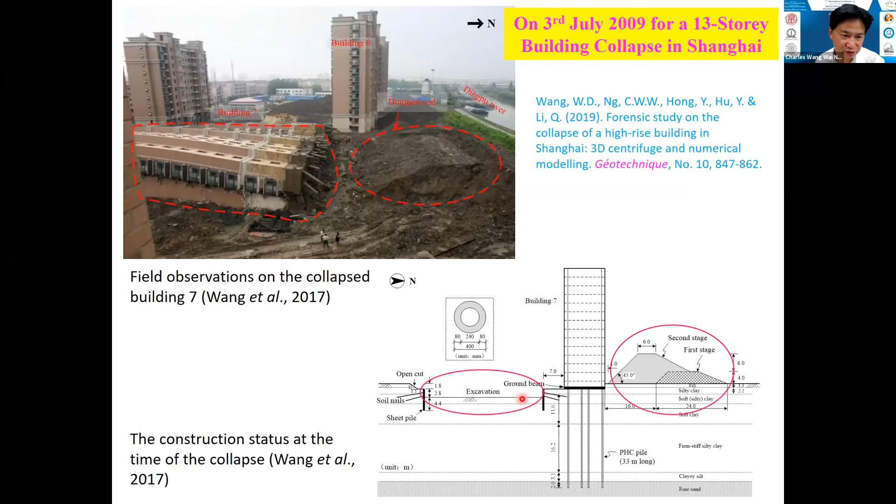Immediately before the collapse, there was filling on the right hand side and excavation on the left hand side simultaneously. After the building collapse, different parties blamed each other, which is why we were commissioned by the Shanghai government to investigate the cause. I won't go into detail, but let me show you a video, and to save time I'll move forward.

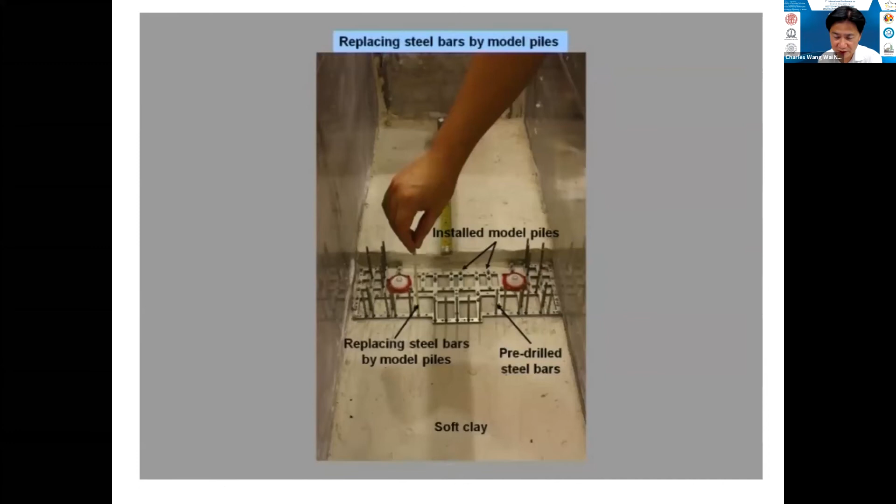I'm moving my mouse to speed up the presentation. We idealized the geology in Shanghai - here you can see a model pile and a building. We scaled almost everything about the problem, including the ground beam of the building. There's a shear wall visible from the top, and installation of the building in the central container.

This is a video taken during one of the tests. Let me stop here for a moment. We used a hydraulic actuator to simulate the filling surcharge on the right and excavation on the left, using a string to let out a heavy fluid equivalent to the density of the soil. This is the last stage of the test.

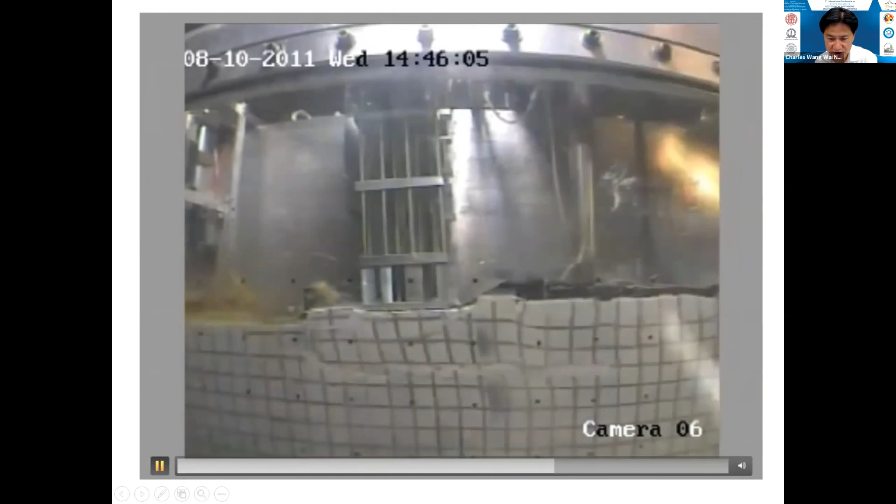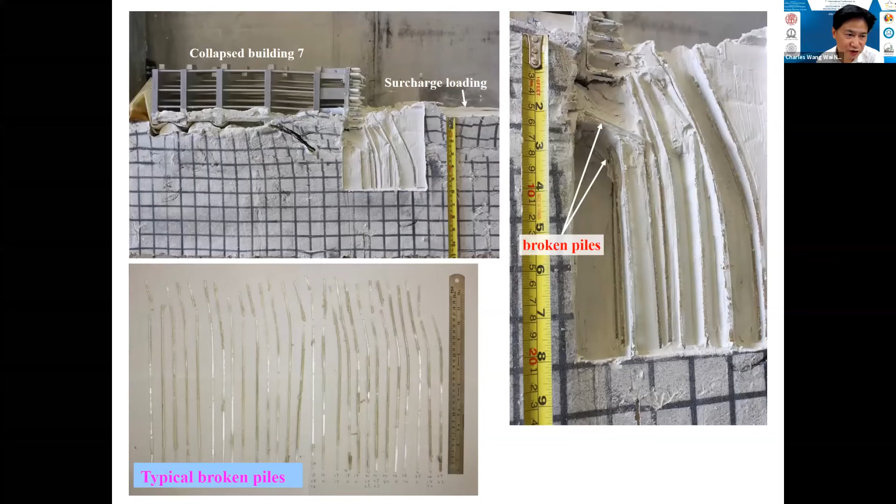After the tests, we can carry out very detailed investigation into where the piles were broken and how they were broken, and so on. You can see a lot of detailed analysis here after the test, and also we can investigate the mechanism. If you are interested, this work is published in Géotechnique 2019.

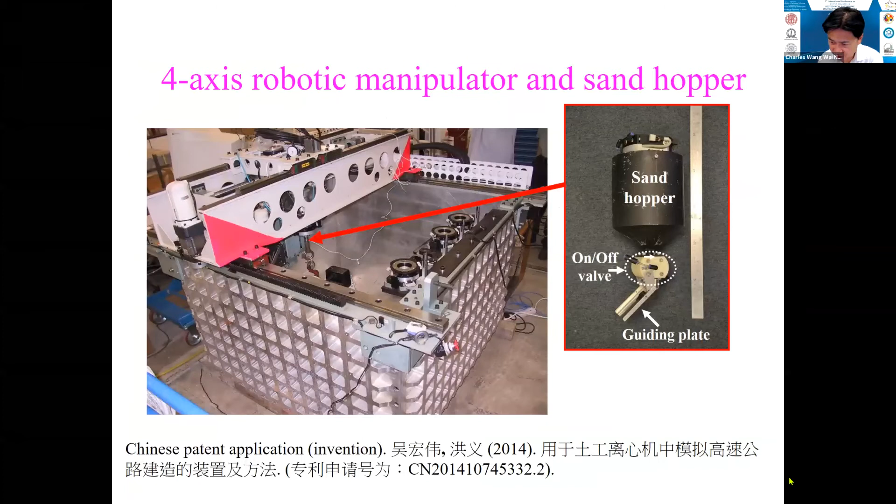Now another development: we use a robot to simulate the widening of an embankment. In the interest of time, let me speed up. So we use a robot and designed this. Let me explain a little bit. We all know that in order to widen an embankment, very often we put piles to support the new parts, and the piles try to minimize the settlement of this new part caused by the consolidation of soft clay underneath.

So now the question is what should be the pile spacing, for instance, and should we use a geomat and so on and so forth? In order to simulate this, one can do three-dimensional numerical modeling, but as I already explained we need some sort of physical test to give us confidence that numerical modeling results are reasonable in some way. We were asked by clients in the mainland to carry out a physical model test. So this is the model part. It saves time, I'll skip that.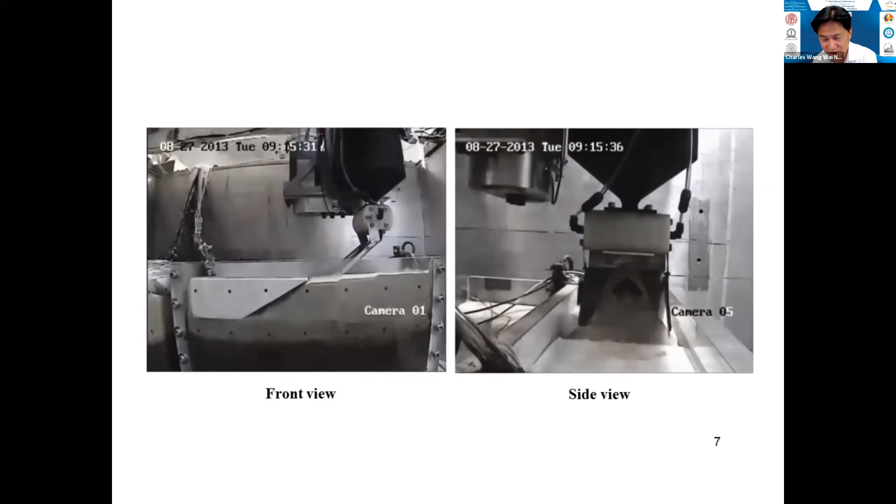Now this is actually using a robot to simulate the embankment construction. This part here is the existing embankment on the right hand side, and now the embankment is being built bit by bit, layer by layer, so that we can properly control the speed of construction in a centrifuge, which mimics what actually happened in the field. We can also control the density of the filling material in a very precise manner by using a robot. This is almost the final touch of the construction.

Let me move on to the third example. As we all know, nowadays the effects of climate change have become more and more evident, or severe, if you like. That's why we developed an environmental chamber in the centrifuge. What does that mean? We can control relative humidity in the chamber, heating and cooling units to control temperature, rain nozzles to control rainfall intensity and duration, and fans enable us to model wind. We also have infrared and ultraviolet light to control heat in our centrifuge.

Here's a picture showing the actual test in one of our experiments. You can see the humidity nozzle being used, and I use high resolution cameras to measure the surface deformation and so on. If you're interested, this is published in Géotechnique Letters 2018, which gives you much more information than my presentation here.

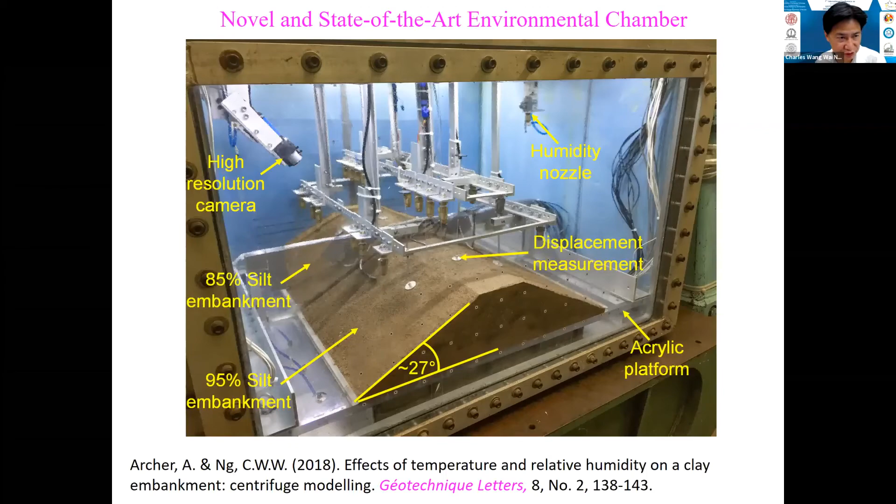I don't know why my computer is playing up a little bit. Maybe we have to wait for a couple of seconds. What happened? Let's see on my laser pointer. Yeah, I guess now it's back to normal. Is it correct? Yes, yes. Okay, good.

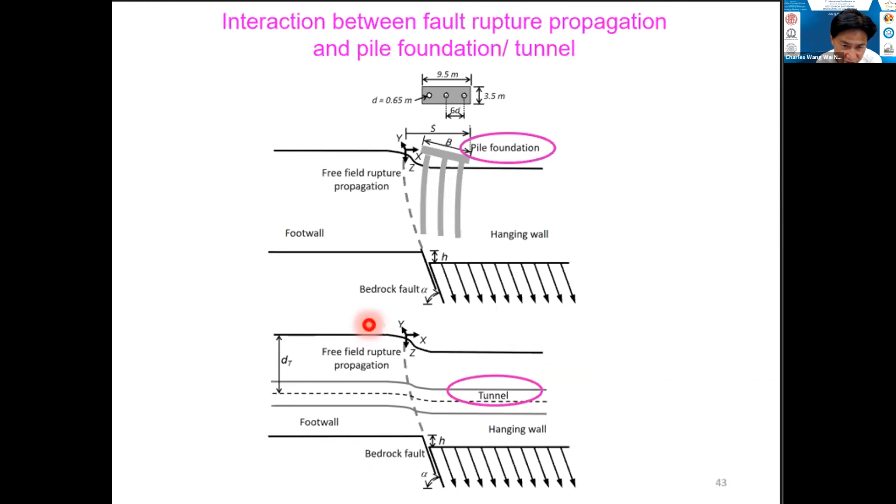What you are seeing here on the left is our model container, in which a single pile is installed. The model pile in prototype scale is a square pile, 0.65 meter on all sides, with an embedded depth into the soil stratum of 15 meters in prototype.

All the tests I present today were conducted at 50 G, 50 times gravity. On the right-hand side here is the 1x3 pile group. On the left we call it PF on the footwall side, and for the hanging wall side it's PH. In the middle is called PB.

For simplicity, we use dry Toyoura sand in all the tests. We work on the effective stress principle, so it doesn't matter whether saturated or dry, which simplifies the problem without worrying about pore pressure. Our objective was not to study how pore pressure dissipates in our experiment.

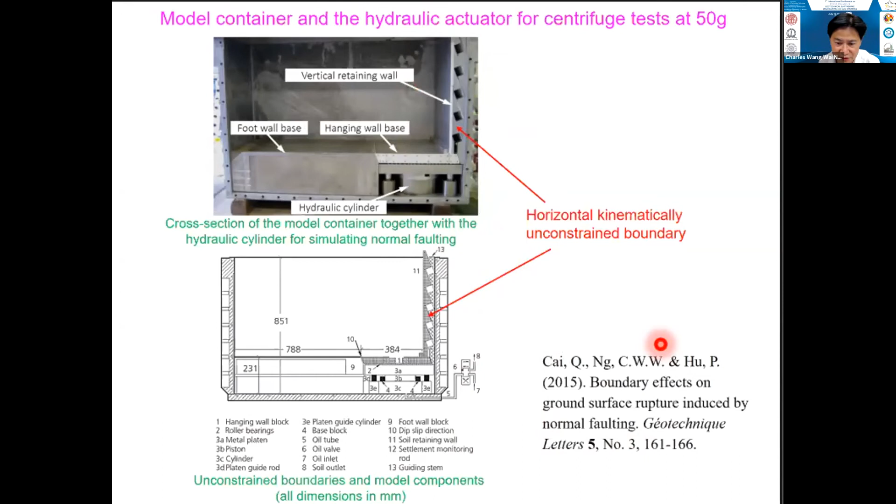The downward fault movement was controlled by a hydraulic cylinder, a hydraulic actuator, beneath this loading platen. During the tests, we created a fault movement in 5 stages, representing in prototype scale 0.4 meter, 0.8, 1.3, 1.8, and 2.1 meters in the vertical direction.

Before allowing the fault movement to take place, we applied a design working load for each single pile and pile group—in other words, we apply vertical load first, then allow fault movement to take place. After spinning down the centrifuge, post-experimental observations were made, and all deformation, bending moment on the piles, and on the pile cap were measured during the test.

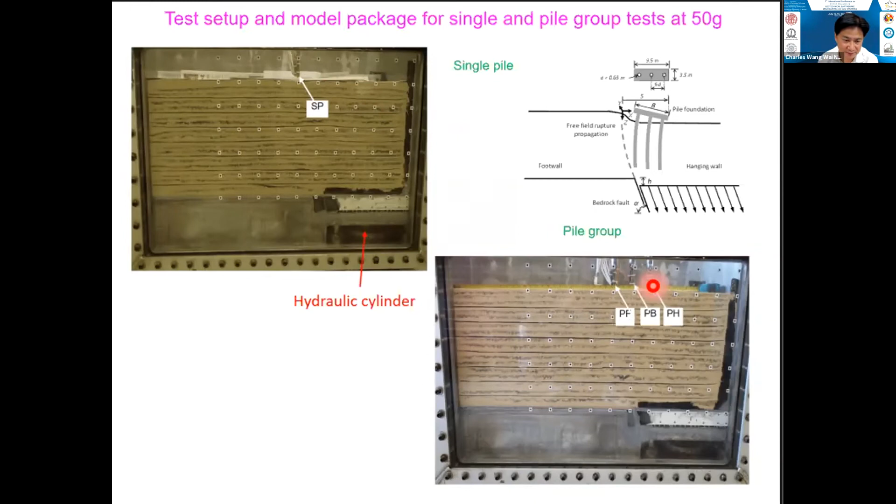We use the continuum model given in FLAC 3D—a strain softening Mohr-Coulomb model with Mohr-Coulomb failure criteria. This continuum model is greatly simplified and cannot take into account strain-dependent stiffness, for instance, but we think it's probably good enough for our back analysis and for our numerical parametric studies.

Talking about parametric studies, this is our plan for the parametric study analysis. There are two series, one for single pile, the other for pile group. What we are trying to study is to answer the four design challenges and objectives.

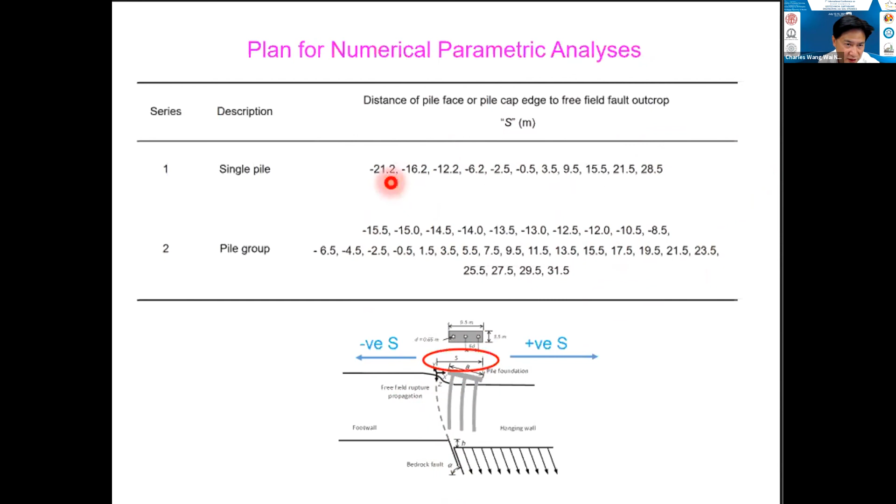In our numerical model, we don't change the fault location, but we change the pile group location ranging from negative S to positive S, from negative 15.5 to positive 31.5 meters. There's a range for the pile group, and similarly there's also corresponding analysis for single pile, also from negative S to positive S.

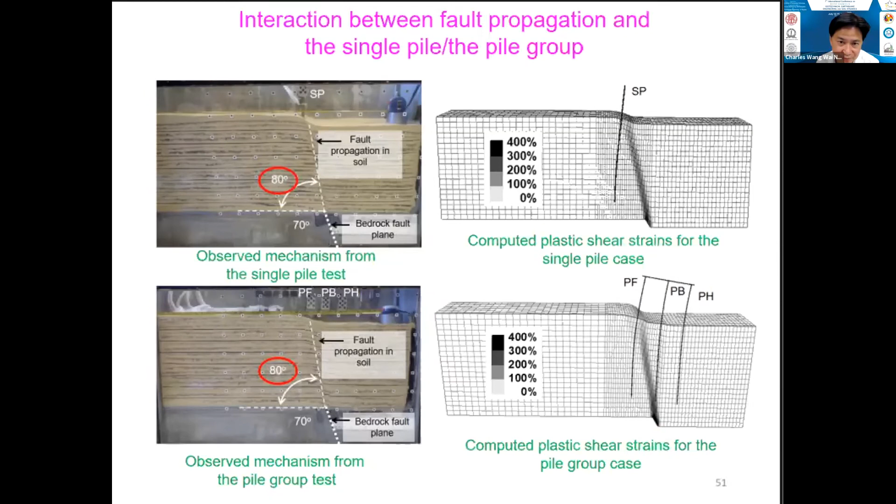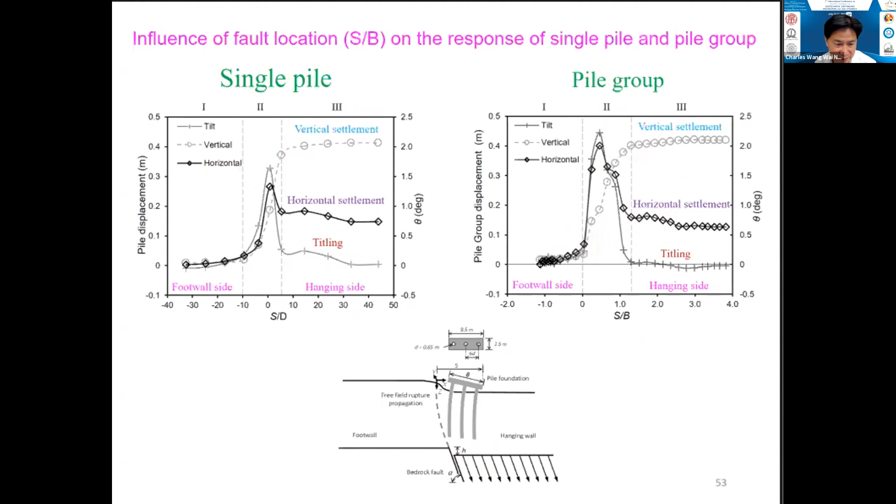A similar picture also emerged in the pile group. So the take home message is there are 3 distinctive zones that can be identified.

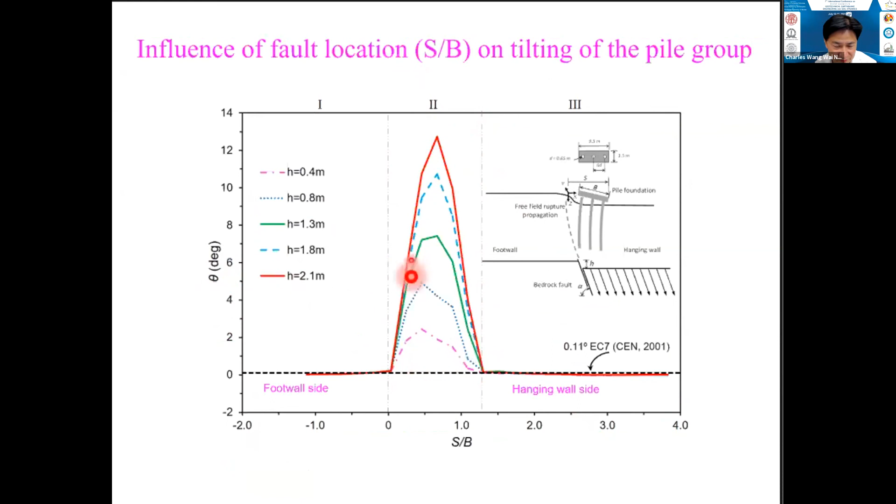And again for the tilting theta, the same thing - it's only zone 2 that is affected. So in the interest of time, I will not go through that.

So let me quickly summarize what we identified. For designers, one thing is very clear: there are 3 zones that can be identified. One is called the safe zone, I call it zone 1 - there's no significant displacement, tilting, or settlement to be aware of in zone 1.

But zone 2 is the transition zone - that's the trouble zone, if you like. Definitely the designers should pay attention if your pile foundation is located in this zone, or if you try to plan your zoning for buildings, etc., then you have to pay attention whether your zoning falls within this transition zone.

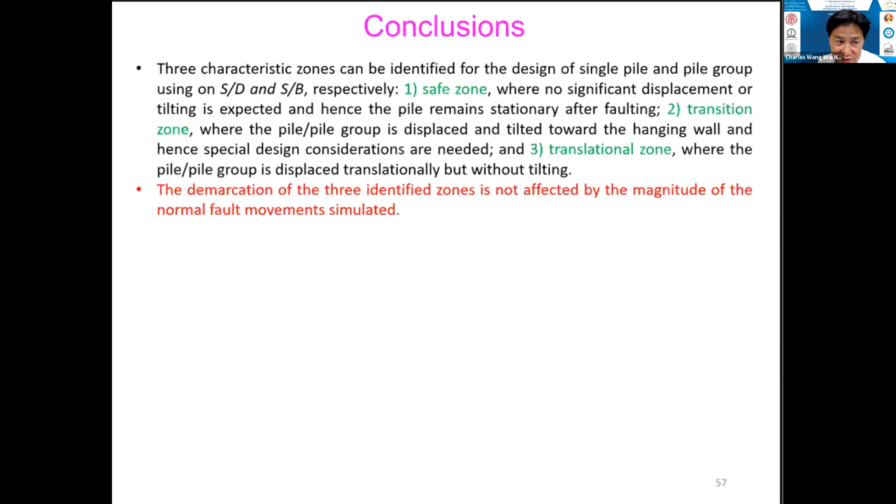And then the last zone is a translational zone - it's a rigid body zone, if you like. We see displacement and translation, but without tilting, for instance for the pile group. And the demarcation of the 3 zones is not affected by the magnitude of fault movement - that's important, and also good news.

Here, just to give you more detail and elaboration on the transition zone, the tilting and associated bending moment of the pile we investigated, which shows the peak value. The transition zone is always a problem.

The tilting of the pile can exceed the ultimate allowable limit imposed by Eurocode 7, for instance, and the maximum bending moment of all piles in the transition zone can exceed up to 5.8 times the ultimate capacity.

So obviously, an increase of thickness or reinforcement should be considered in the design of the structural capacity of the pile and pile cap. The computed maximum tensile force in the middle of the pile group exceeds the ultimate tension capacity by up to 57%. Again, the tensile stresses must be taken into consideration in the design.

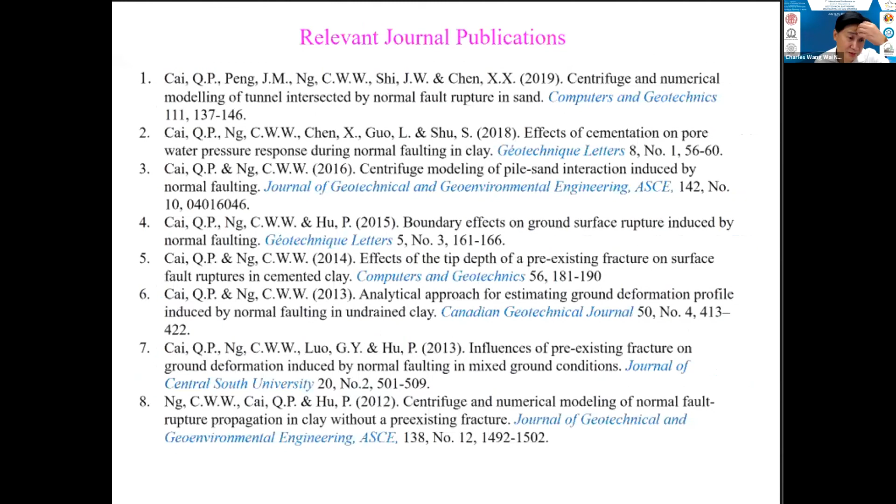Here's a list of relevant publications. If you are interested in the work I just presented, please take a quick look, and if you do need these papers, let me know. Thank you for your attention, and I apologize for a bit of overrun in my presentation.